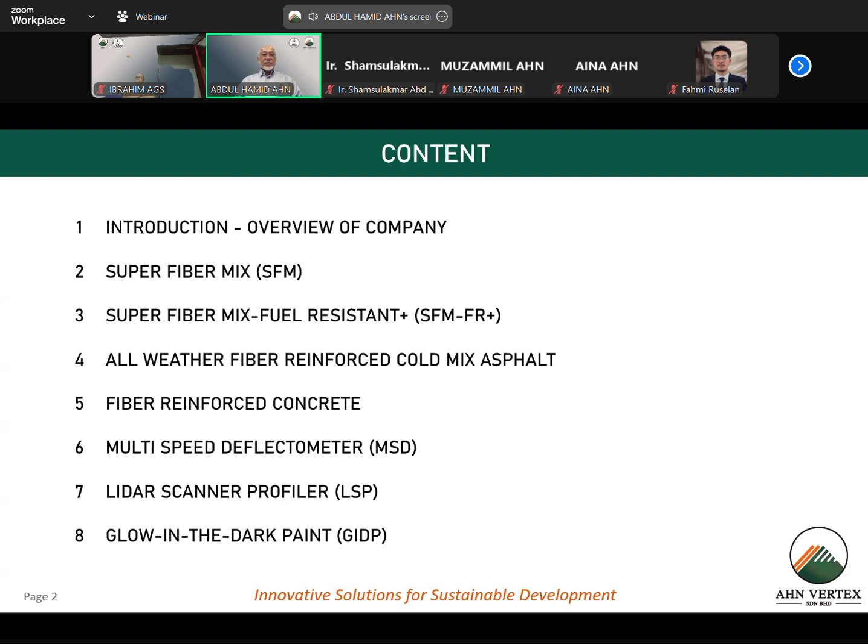Next. Right, okay, this is the company. Like Haji Samsul mentioned, established in 2015. So we are going to have our 10-year anniversary, inshallah, by February next year. Pejam celik tak sangka dah 10 tahun dah.

It is a company registered in Shah Alam. Presently, we have offices in Shah Alam Section 14. We have one at Denai Alam, and we have our warehouse and mini factory in Monteres. It's a 100% Bumiputra company.

When we established the company, the idea is to be different. The idea is to look at where is the gap in terms of technology that we can apply in Malaysia, so that at the end of the day, we want to solve problems. We want to give a better quality roads.

Presently, I think things have changed a lot. We're talking about the traffic itself has increased more than tenfold if you compare to 20 years ago. The type of vehicles is so different. And the weather in recent years has changed. So here we're talking about the environment has changed, and therefore we must change also the road construction technology to cater for all these changes.

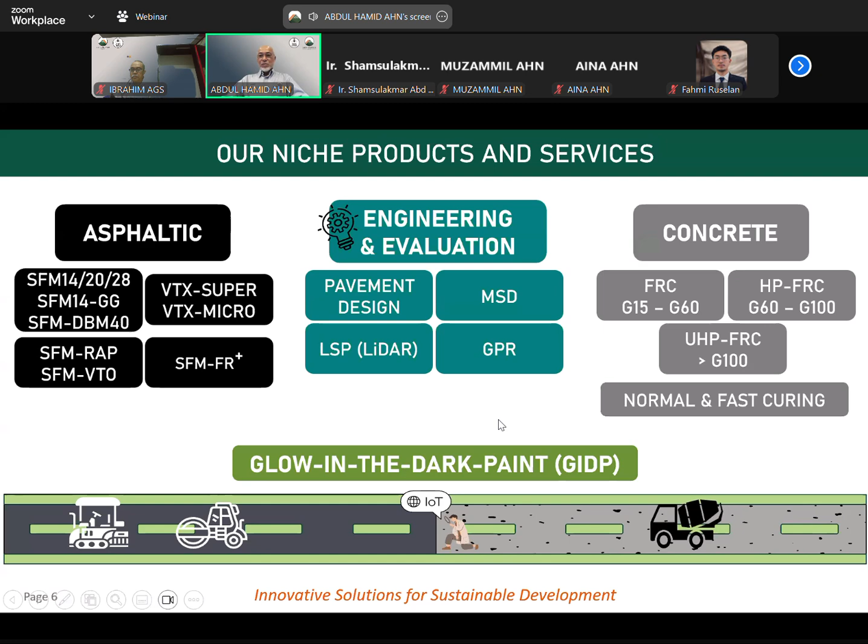Last but not least is the glow in the dark paint. It started as a hobby while looking at what new technology we can introduce. That's how the glow in the dark product came about, which will be presented by Mr. Muzamil. Okay, let's talk about the first subject.

We basically introduced this SFM in 2017. What is it? Like I mentioned before, the normal AC14 is good, it has been used widely around the world including Malaysia. But it also has its limitation because it doesn't last as long as it needs to, especially with the condition of traffic and weather now. That's why we came up with a special mix called super fiber mix.

What is it? It's basically a base material which can be any hot mix, applied in wearing course or binder course. So it can be used as normal dense mix or special gap graded mix, also in the binder with different sizes of aggregates, using normal bitumen, PEN 60/70. So that's the normal bitumen — we are not using any special bitumen because, like I said, one of the criteria when we develop a new mix is we want to make it cost effective. But we add a special fiber called Forta-Fi fiber, which consists of two different fibers.

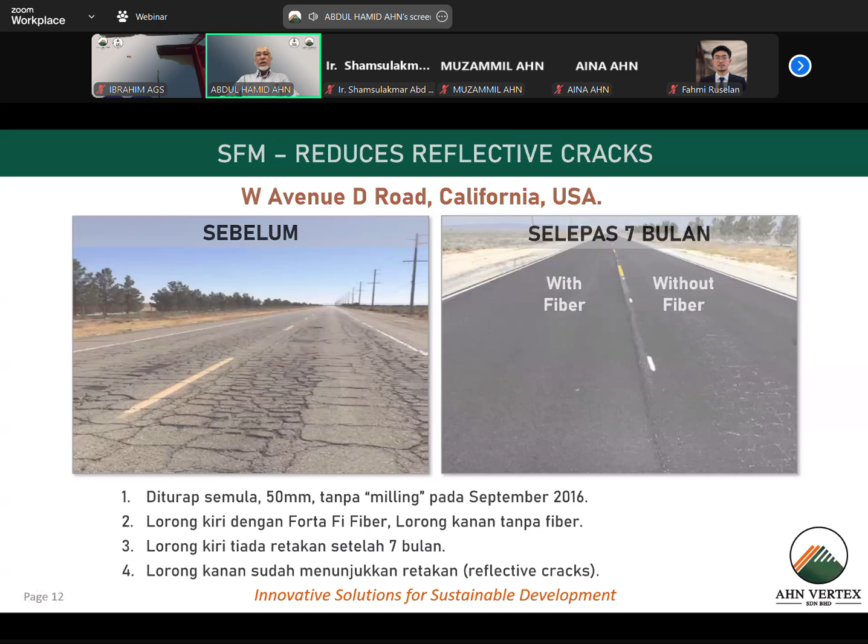This is also a very interesting video that I want to share with you. Before that, I just want to show you that when we add the fiber at the dosage we use, very low dosage, only 0.05% by weight of fiber to the mix, it provides quite a lot if we arrange the fiber. I'm talking here about aramid fiber: 1 cubic meter of asphalt contains 950 kilometers length of aramid fiber. So it's a lot. Although by weight it's very light, because it's light, the volume is high.

The best thing is that with the fiber, it reduces ruts and cracks. Here is a video just to show you how strong it is when we add the fiber into the mix.

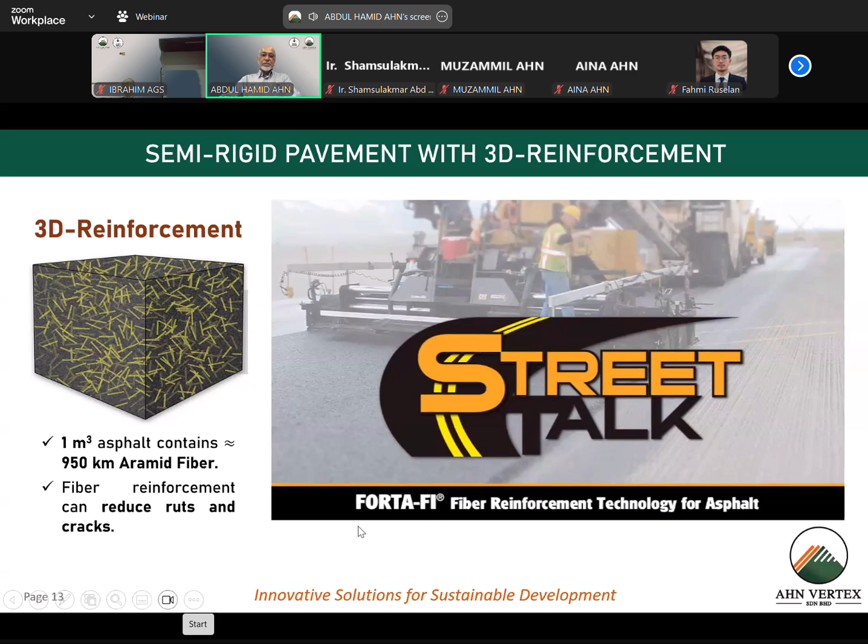One of the biggest challenges we have is talking about how to fortify this. Let me show you this: when we add the fiber into the mix, it will look like this. You can see the fiber strands here clearly. You should be able to see the fiber because it doesn't melt at the mixing temperature that we use.

This is fiber reinforcement - we actually have fibers living within the asphalt for the life of that product. If you put this product in, what we noticed was something very interesting. That was a project where typically, when you have a pipe that breaks, the asphalt will go over the edge of where the ground had washed away, and it simply breaks off.

In this particular case, I'm going to show you - this location is at a Boeing manufacturing plant, at one of the taxiways. SFM is used in runways and taxiways of these facilities to reduce maintenance.

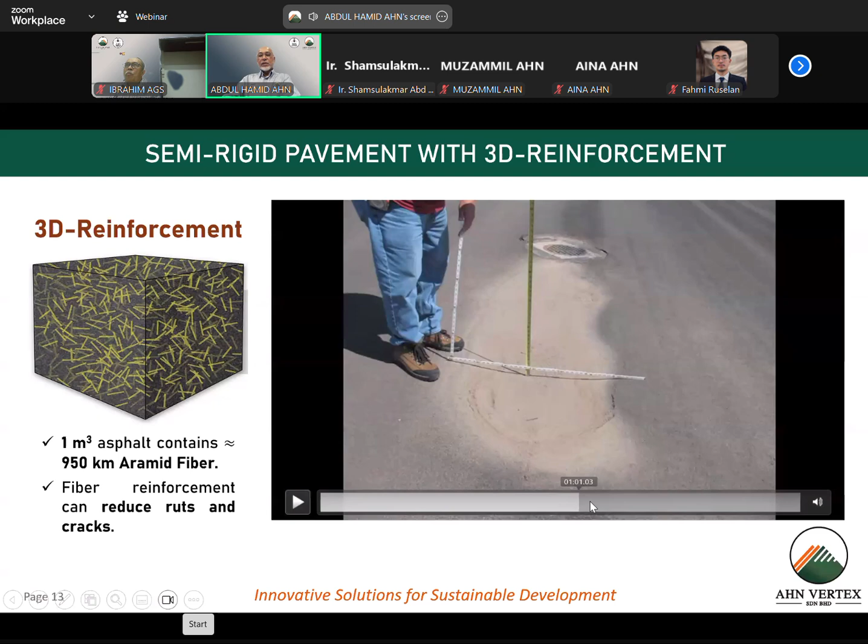Let me try to find it. Okay, this is the picture. We used SFM in this pavement, but there was a failure because of a pipe break. The pipe was broken, water got to the bottom at the base, and therefore it sunk a bit.

Typically, if you have a lot of water underneath, you can see crumbling and basically disintegration of the mix. In this case it didn't - it only sunk, with some minor cracking at the edge. But it failed, so it needed to be repaired. There's a manhole pipe across here, and a pipe leak caused this defect.

This mix is called semi-rigid pavement - this is what we mean by it only having a 2 or 3 inch crack even where the ground had washed away. I asked them to repair it and send me videos or photographs, and what we got back was really amazing. They ended up doing a saw cut around the entire piece, attached a single anchor point in the center, and plucked out an 8-foot-long slab of asphalt in one piece. Why? Because of the reinforcement provided by the fiber.

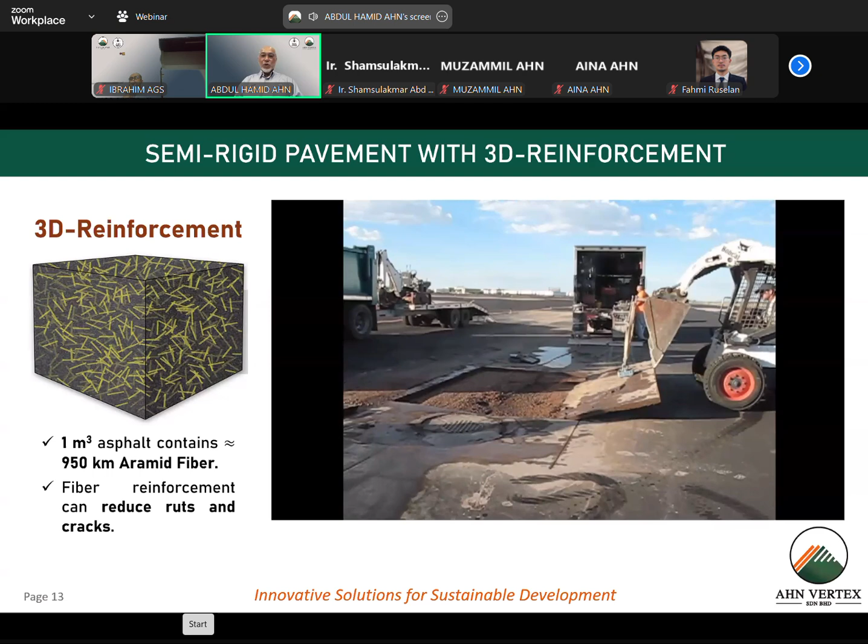This is also a case when we talk about stronger and more durable pavement. This is at the Meru Tunnel, or Menora Tunnel - some people call it Menora Tunnel - on the southbound Plus highway. This is the condition before January 2021. It was badly defective and had to be frequently maintained - almost monthly maintenance was required. The severe issue was ground failure because of water encroachment into the lean concrete underneath.

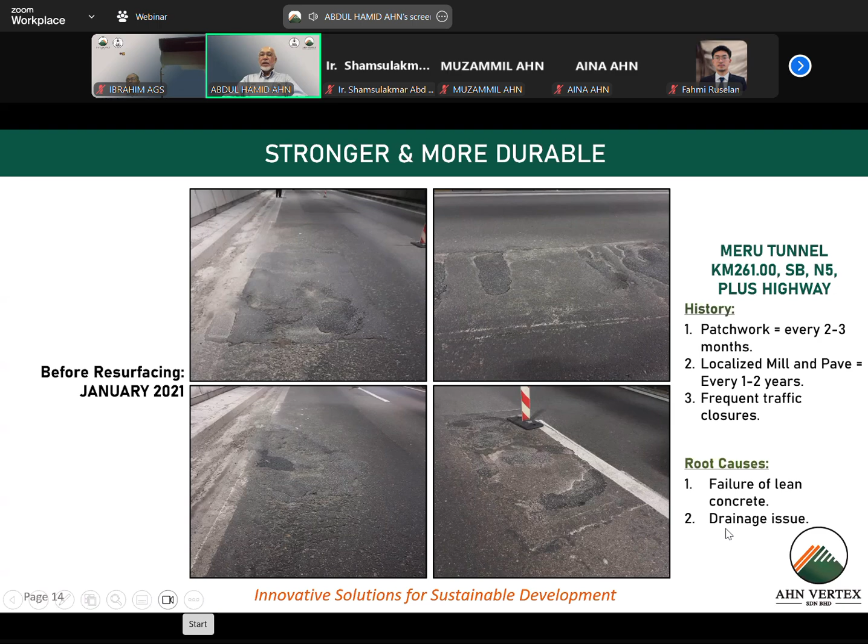These are the tunnel and drainage issue problems. So what we did, together with the Plus team, was come up with a solution where we permanently repaired the drainage issue and used SFM. So until today, instead of defects every month, with the SFM there's been no maintenance for the last - I think it's coming up to 1.5 to 2 years now. Yeah, 1.5 years, no maintenance. So you can see the strength really helps reduce maintenance.

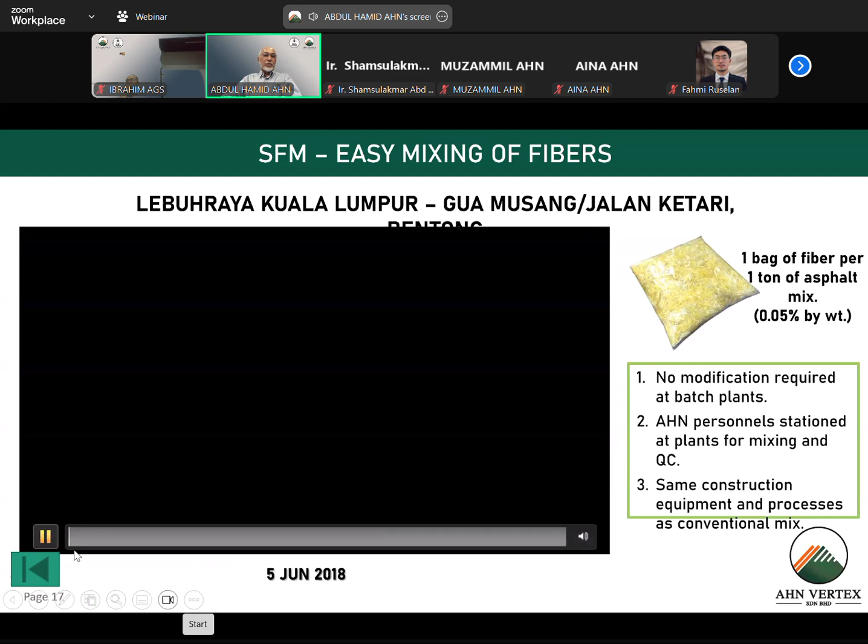So that's stronger and durable. Another advantage is that it's so easy to mix - we design it such that there's no requirement to repair or modify the plant. Our fiber is infused into the mix at the plant. This is a good video of a project we did in 2018 with JKR and Roadcare.

Just throw the bag there. It looks easy, yeah? Of course, only qualified people will do the mixing. It has to be done at the right time, right place, right temperature, at the right dosage. But you don't need modification of the plant. So that's why SFM now is one of the mixes that is widely used in Malaysia, because the application is so easy.

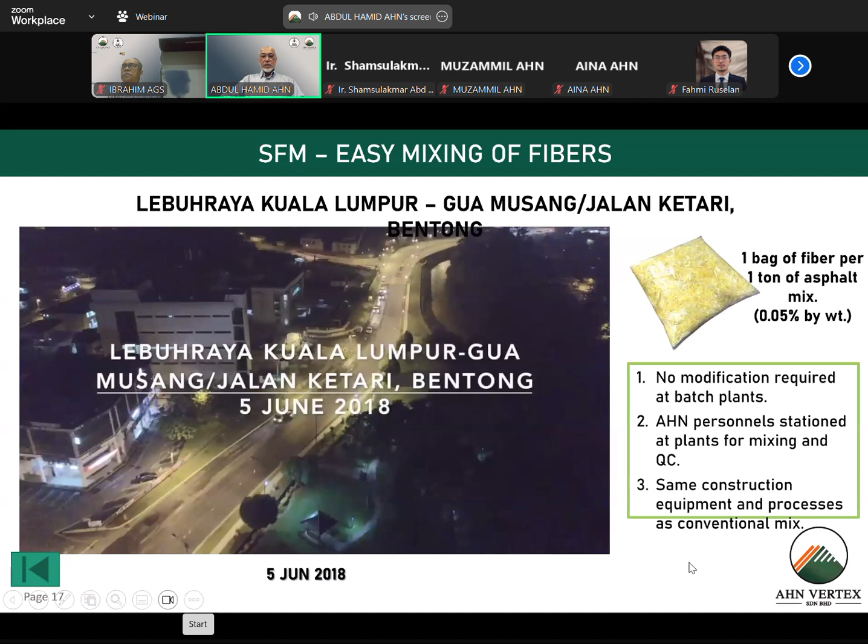Installation is also simple, let me see if there's any. Installation basically is the same installation technique as per the conventional. There's no change or modification to the procedure as well. So it's really plug and play. What we need is only to add the fiber into the mix at the plant.

You have a longer working window. This is good for the contractor because normally when you send it from the plant to the site, depending on the location of the plant, you lose temperature, and there is a minimum temperature you need to keep so that when you lay the asphalt mix, it can be compacted. But the beauty, one of the advantages of SFM, is the heat loss is very low, so you can keep it longer at the roadside. You never know there will be a problem at site where you have to keep the lorry at the roadside longer, and you don't want to lose the heat too fast. So this is also an added advantage.

Another advantage is proven track record. We have used it quite a lot in Malaysia. In fact, our record as of December last year, we have paved equivalent to more than 8.6 million square meters of roads in Malaysia, especially in JKR and JKR State, which is 69%, and the highways, mainly PLUS highway, 25%, and the rest comes from PBT. So it is proven track record. It is suitable in Malaysia. We have more than, I think, seven years of track record in Malaysia, including Sabah and Sarawak.

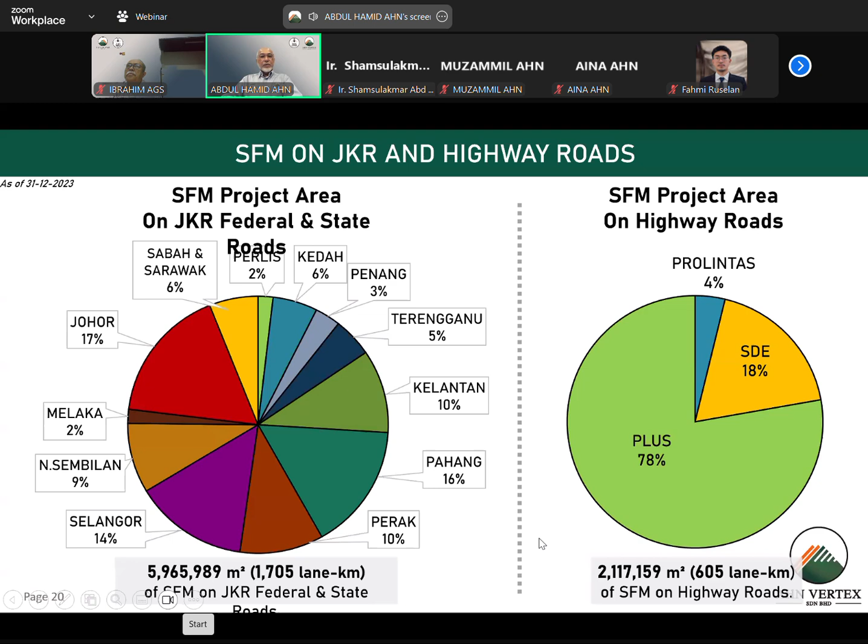This year we have also used it with other highway operators like PLUS SDE, probably others as well. I think this year we have NPE, quite a few, 2-3 concessionaires are using the SFM project now. So I think that's proof that it is suitable and it works, and we have repeat orders.

This is our clientele, basically all major players in Malaysia, have already used our SFM.

Okay, let's look at the performance of SFM. So you look at the performance, it is really proven. Look at the normal stability, Marshall properties. If you look at AC, normal AC JKR specification has to be bigger than 8,000 Newton with flow 2-4 and stiffness more than 2,000. Our specification is of course different because it is a specialty mix.

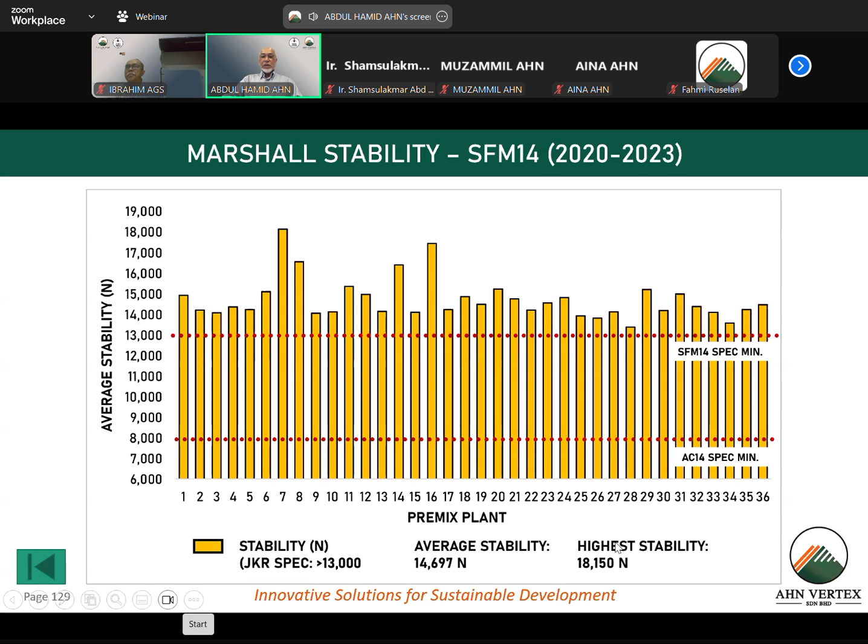This is the track record, some of the track record that we have done. This is at Jalan Istana in Pahang, where we only overlaid.

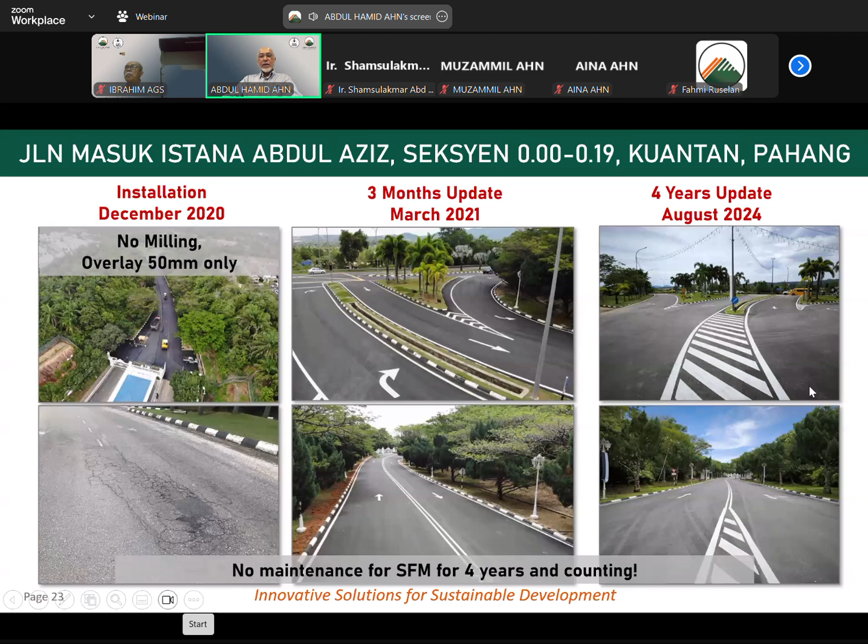Where we only overlay, we did not mill. This is the condition before. In this case, because of the budget constraint, I think JKR and Roadcare decided just to overlay, in view of the base is still good. The crack is severe, but it's not total failure. So we just overlay in 2020, and so far until today, Alhamdulillah, it's already coming to 4 years, still in good condition without any defect. So if we talk about maintenance, there's no pothole for the last 4 years, and there's no maintenance, so cost is very low.

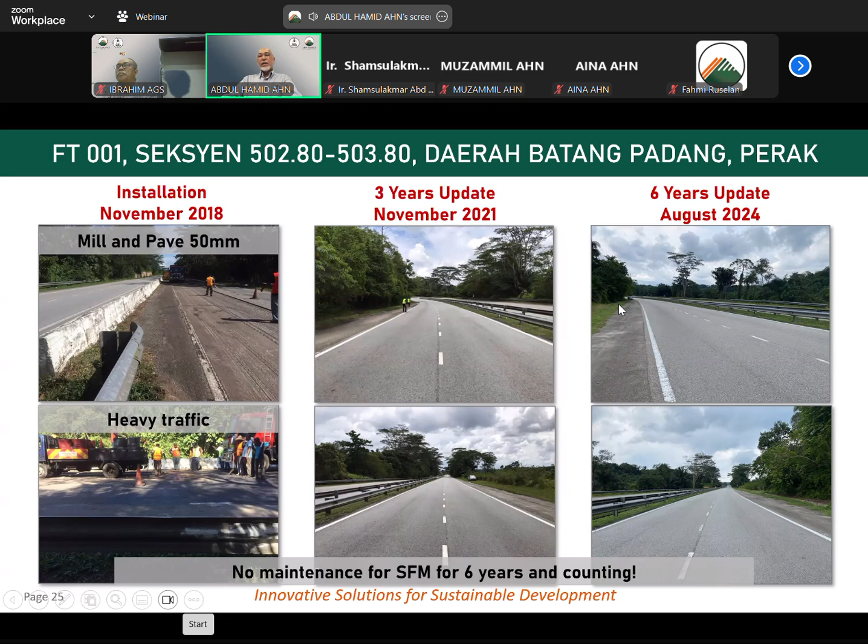In fact, the longest one that used SFM is already more than 10 years actually in DBKL, which I will share with you later. Another advantage is the moisture resistance. In Malaysia, as you are aware, it's a tropical country, it's very wet, we receive plenty of rain. Most of our properties, if you look at the standard, does not emphasize on the ability to resist water issues.

But in this case, just want to demonstrate that with the fiber, it can reinforce the mix better by providing a high tensile strength and high tensile strength ratio. When I say ratio, it means the strength of the mix in wet condition compared to the strength of the mix in dry condition. Meaning, the higher the better. Under perfect condition, we want it to be 100%. Meaning, you notice in Malaysia, after rain, you can see the defects start to arise, start to come, you can see it start to crack, and some potholes will develop.

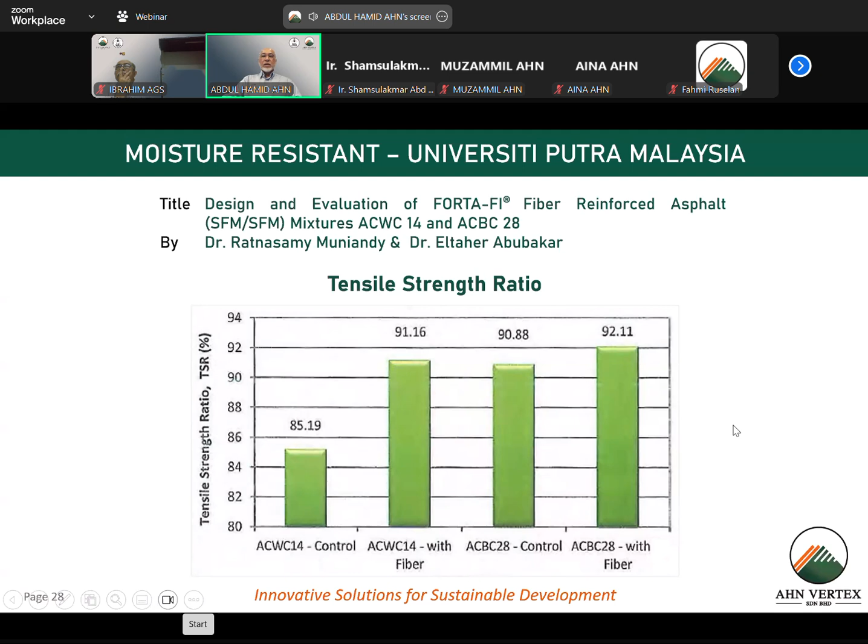Why? Because during wet condition is where the mix is the weakest. Tensile ratio, because water is the enemy of the pavement. Once it's wet, it's the weakest. Imagine when it's weaker, and with the pumping pressure from the tire, that's where the cracks start to happen, and in some cases, spoil of the mix. So you want to have a high TSR, tensile strength ratio of mix. In SFM, our average is about 89% in the real world, and sometimes it goes to 80%, 90, almost 100%, like 98, 97%. Compared to the normal one, at the lab level, this is 85%, in real world it varies between 70 to, I think, 85%. So tensile strength ratio of SFM is higher compared to the normal one, and that's why we have cases where...

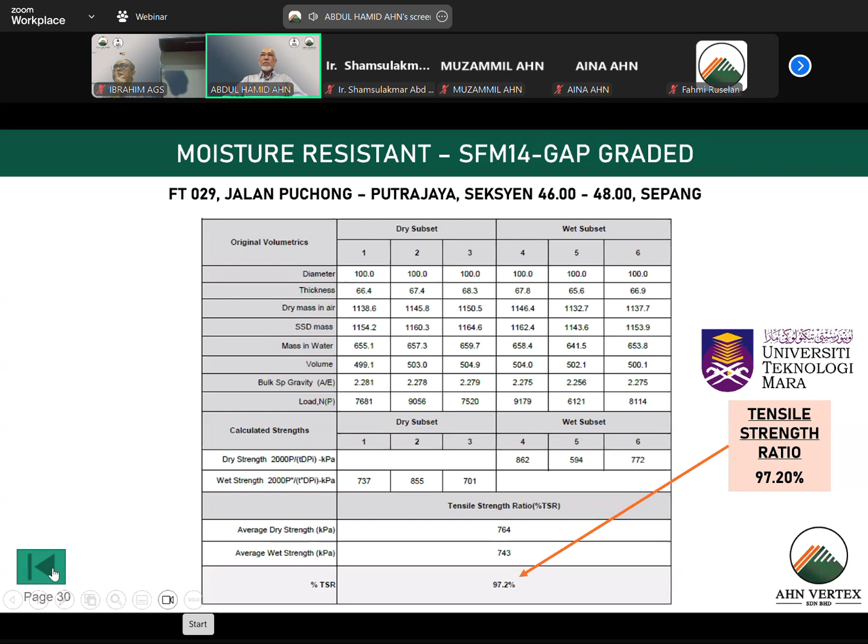In this particular location, our TSR was about 97%. Yeah, it's very, very high. That's why it doesn't fail easily, even though at wet condition, because the strength during wet condition of SFM is about the same as the strength when it's dry. Okay, supply so far, I think we have never failed to supply, even to our big clients like Plus and JKR, where yearly we are talking here, we are producing almost more than 200,000 tons yearly.

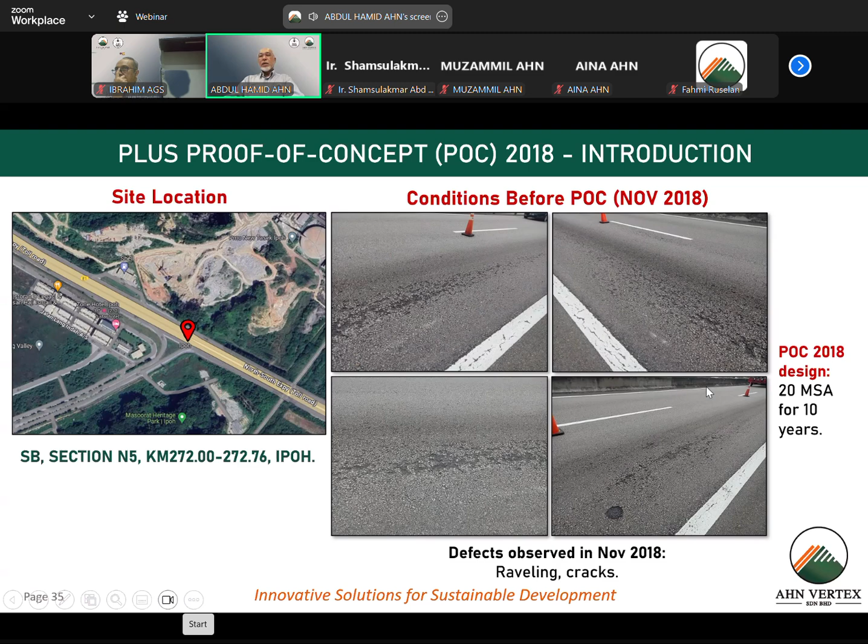And cost is the most important thing. With the use of SFM, this is the case in Plus. Location is at northern region at Ipoh, kilometer 272 to 272.7, about 760 meters. This is actually proof of concept when we did it in 2018. This is the condition of the pavement before the POC. There's a lot of crack, raveling, and at that time the design of the road is actually 20 MSA for 10 years, so they expect in 10 years to achieve 20 MSA.

But in real life, actually we achieved more than 23 MSA in half of the time. So that demonstrates that the traffic volume in Malaysia has increased, in this case doubled within less than 10 years. We have 3 sections in this POC.

One is mill and pave 200 mm, we call it MP 200. This is the control section where we use conventional mix: about 90 mm of DBM, 60 mm of binder, and 50 mm of wearing course.

The next 330 meter section, we change things. We do not touch the DBM, we only change the binder with normal mix AC28 60 mm, and use SFM on the wearing course. So here we call it mill and pave 110, because 110 mm of new material is used - the bottom is normal, and the wearing course is SFM.

The last section, about 330 meters, mill and pave only 50 mm. So we just replace the wearing course.

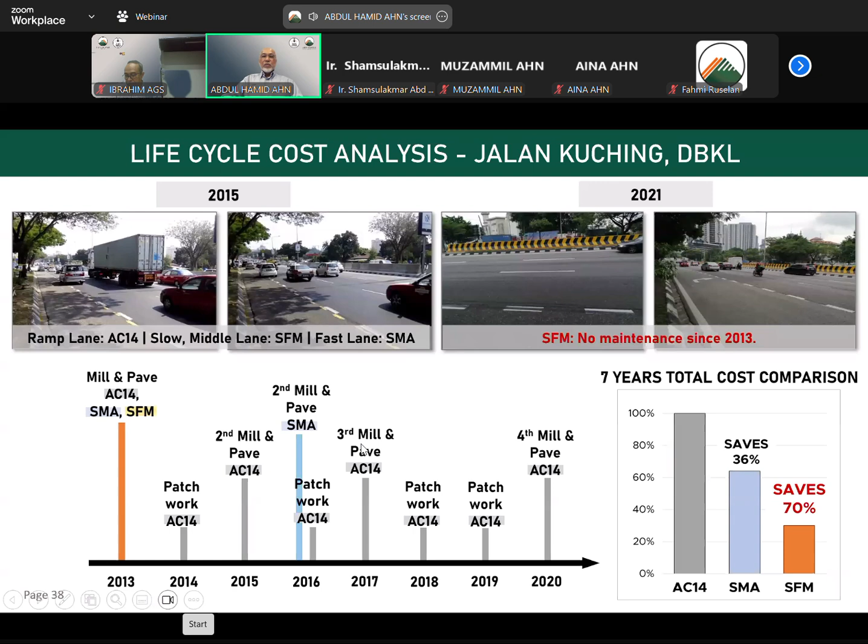If you look at the cost, without looking at cost escalation of material, just looking at the cost of the day, compared to normal AC14, SMA saves about 36% cost - talking about maintenance cost life cycle. With SFM they can save even more, 70%, because it can last longer. Alhamdulillah, until today the road still requires no maintenance, but I think since last year I can see there's minor defect happening in the SFM section. But here we're talking about 10 years, so I think it's very, very good performance. This is also a good cost comparison in terms of life cycle cost.

So I think that's the most important thing for any asset owner, in this case the government, looking at cost effectiveness of material. This will help the government reduce maintenance cost over the life cycle. It's environmentally friendly, and we're getting the green certificate soon. Not only is the material itself beneficial, but less natural resources will be used because there's less maintenance required. We can also use recycled material to make the SFM.

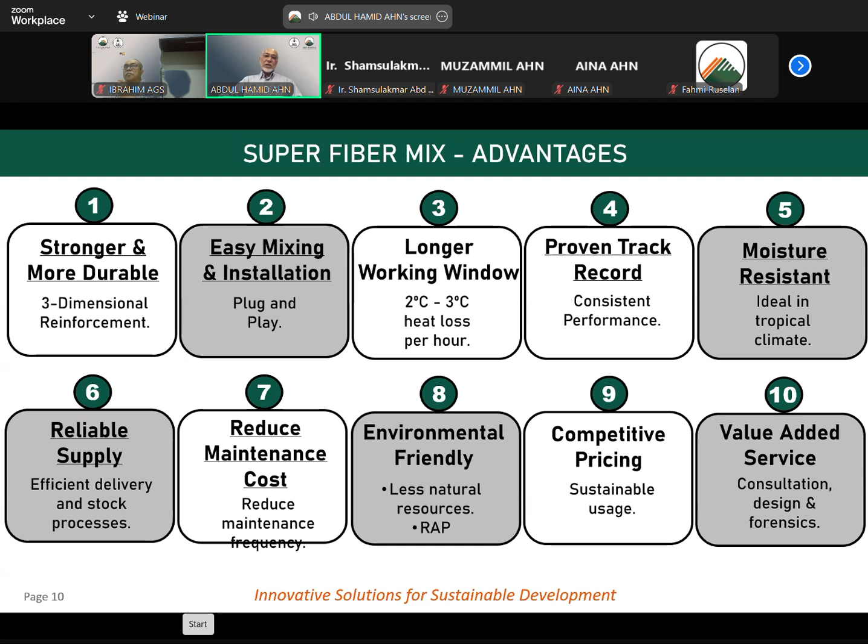So there are many advantages for the SFM. The material is approved by JKR. In a nutshell, a very good performance by SFM has been demonstrated over the last 7-8 years, and so far it's one of the specialty mixes being used in Malaysia the most. So that concludes my first session. It took a bit longer, but we will quicken it a bit since it's already 11.

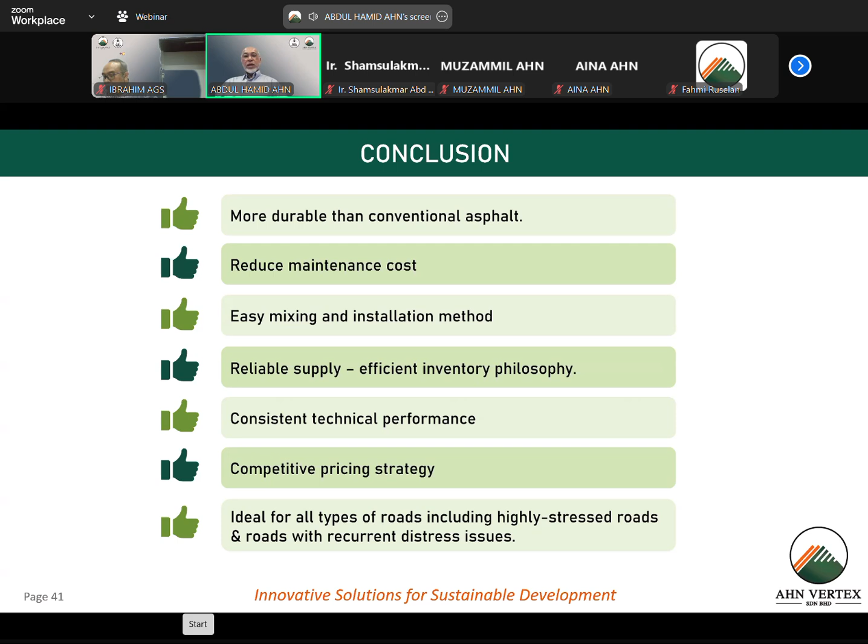No, so far we have not experienced that. With the QA/QC process we have put in place, we make sure the mix is done properly. The first thing everybody should know is that the mix is done by AHN VERTEX ourselves. We will send 2 or 3 qualified personnel, engineers or technicians, to the plant to do the mixing. So far we have not experienced any problems with the mixing, though there are QA/QC processes we need to implement.

Assalamualaikum warahmatullahi wabarakatuh. Okay, let's continue. So the next topic will be super fiber mix fuel resistant. This is actually our latest product, and it is an extension of the super fiber mix, but it is fuel resistant, whereas SFM is not fuel resistant.

As we know, asphaltic material is very susceptible to degradation by fuel spillage, which can occur either because of high volume traffic or a faulty vehicle. The problem is when there's fuel leakage, it will seep into the asphalt material and dissolve the bitumen, causing it to peel off and causing raveling on our road. In fact, there's a study where they submerged an asphalt core in diesel and observed the resilient modulus performance over a long period of time.

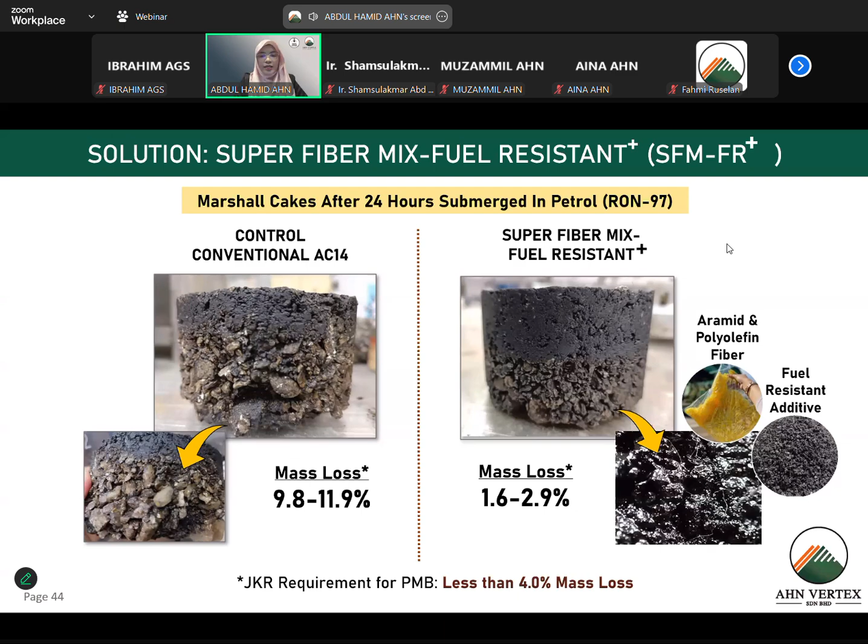Following the JKR requirement for PMB, the mass loss must be less than 4%. For control or conventional AC14, the mass loss is very high, about 12%. But when we add our aramid and polyolefin fiber, the same fiber in SFM, plus another fuel resistant additive, it can reduce the mass loss to only 3%, between 1.6 to 3%. So this new product is actually fuel resistant.

Resilient modulus, as explained by Encik Hamid, is important. Let's say we want to design a pavement and we know one pavement has a higher resilient modulus than the other - we can make this pavement even thinner, so we can save costs in this situation.

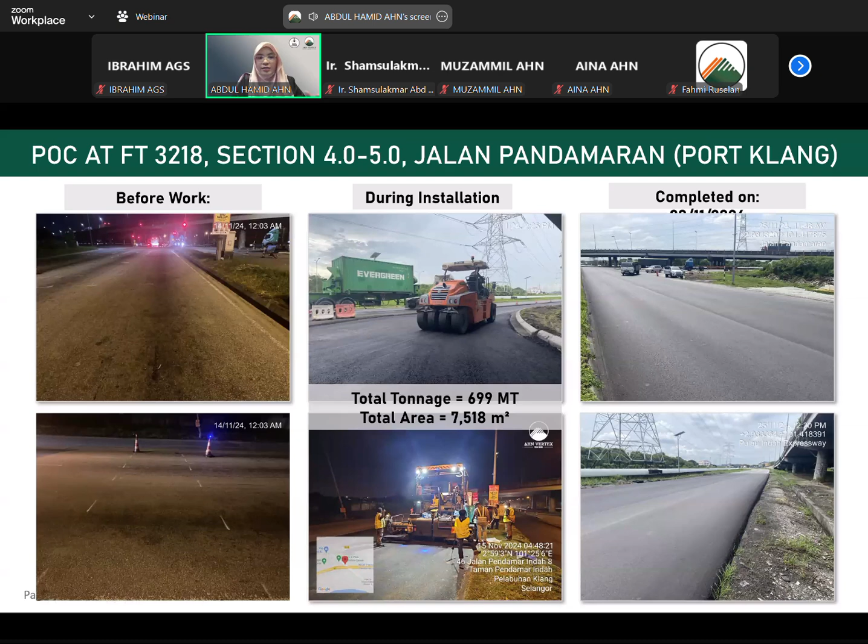The total area was about 7,000 square meters. You can see the photos for the before work - there's a lot of diesel spillage because there's a lot of traffic lights here as well. As of now, about 1 week after, the condition of the road is still good, even though there's fuel spillage, it's still maintaining its performance, and there's no raveling.

Now I'm going to talk about the next product, which is our fiber reinforced all-weather cold mix asphalt.

We know in Malaysia there's a lot of potholes, and if there's potholes, you need to patch them with cold mix. There's a lot of cheap cold mix available in hardware stores, but even if you buy cheap cold mix, if you have to keep patching it over and over again, the long-term cost is actually really high. So we offer the all-weather fiber reinforced cold mix asphalt - at a bit higher price compared to conventional ones, but because it's very durable, instead of patching over and over again, you only need to patch it once and don't have to worry about it anymore.

The special thing about these two products is they have the same fiber as our SFM, and we also have a chemical additive to improve workability on site, making it easy for contractors to use the cold mix, and also for storage. This product is also our own R&D since 2018, 100% Bumiputra, our own formulation, our own manufacturing.

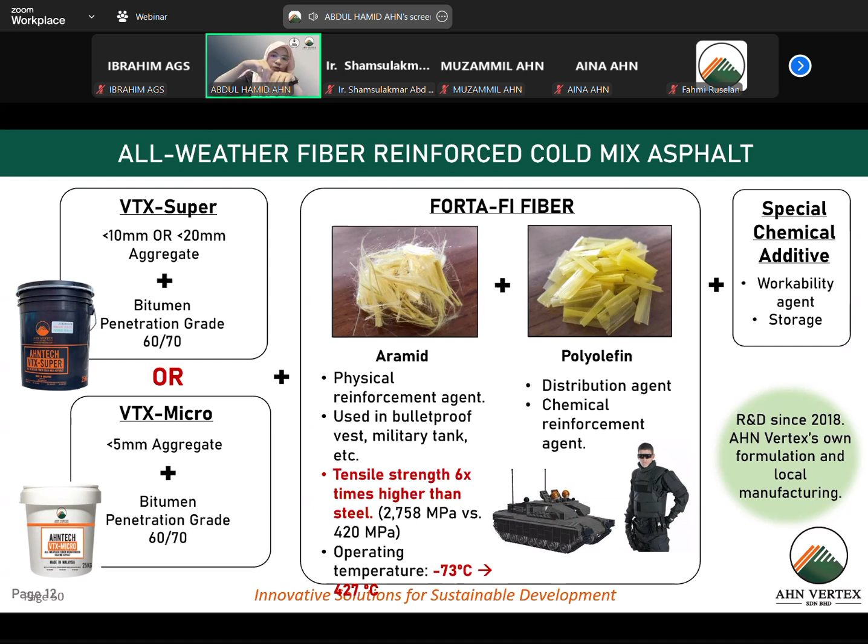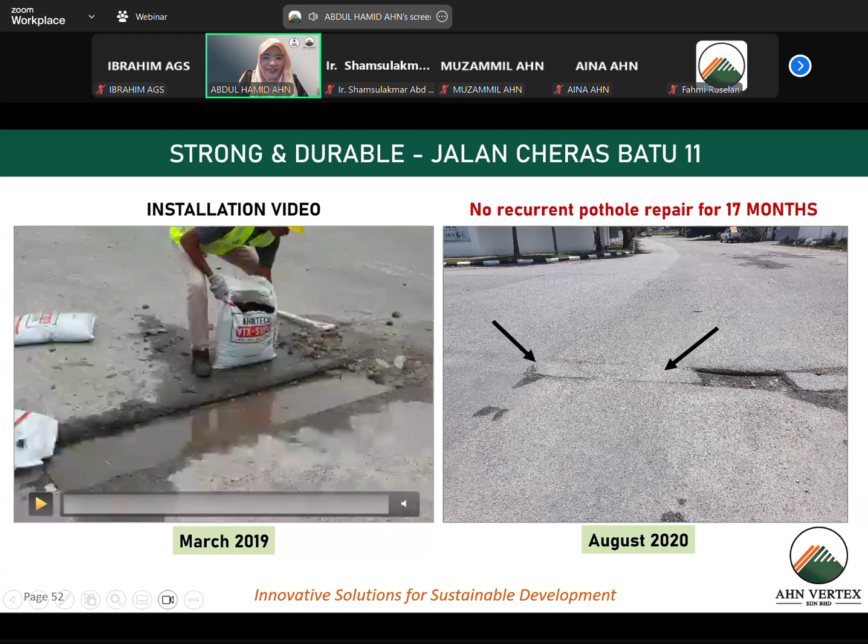This is an example of our product. This is our first test done in Jalan Cheras Batu 11. Back then we still used gunny sacks.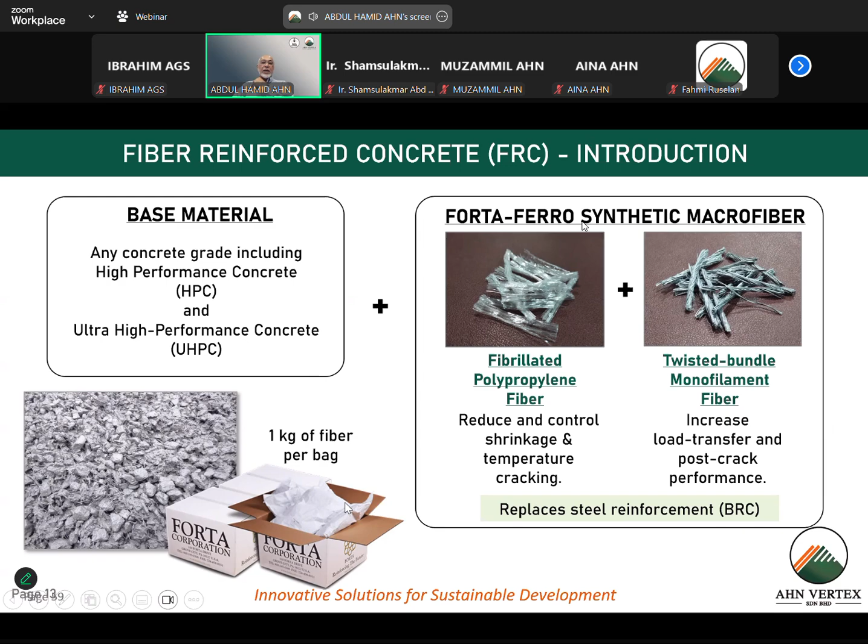The idea is basically to replace the steel reinforcement, BRC or mesh wire if you want to call it, so that it is easier to handle, and inshallah it will also be cheaper. It comes in a 1 kg bag of fiber.

Application is only for non-structural elements. It can be used in concrete pavement, basically concrete on grade, floor on grade, factory or warehouses, motorcycle lane, road curb. For multiple level building parking lots, you can also use it for the topping.

You have already the concrete slab, and then you want to top it with the fiber concrete. Can use for drains. Can be mixed in situ at the site. A New Jersey barrier can be used also, or for a jogging track.

This is for house developers or area commercial development. Can also be used for shotcrete, helicopter pad, or any floor concrete on grade. So it's only for non-structural use for now.

We are doing R&D to see the application on structural elements. What are the advantages? Main advantage is it is stronger and more durable. It provides three-dimensional reinforcement. Here I have a demonstration why it works.

This is a video comparing the impact test, one using ferro, the other on the right side without the fibers. We just try to hack it using a jackhammer, and you can see on the right, where there is no fiber, it just breaks into two, just fails.

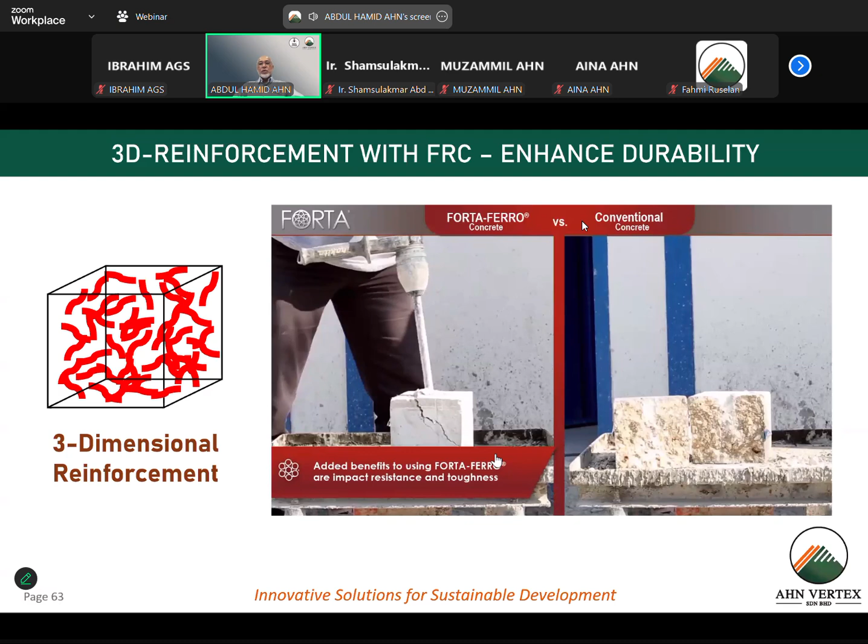While the one with the fiber stops. It still fails at the same time, but it has post-crack resistance to make it more durable. In this case, it really takes a long time to break it. Trying to help break the cube, and at the end of the day, of course, you can see it's broken, but you can see the fiber there - it takes much longer, more than 10 times, to crack open the cube, because with the three-dimensional reinforcement, it provides resistance to crack propagation.

Here is a simple compressive test, the normal test on the right without the fiber, on the left with the fiber. So we compress it, and you can see it fails about the same time, but the nature of the failure is so different. On the right, it already spoiled, while on the left, because of the fiber, it still holds the pieces together. You might have a crack, but the fiber will help to control and resist the crack from going further.

On the right side is a simple impact test where we use a thin slab and drop a hammer. The first one is the slab without fiber - we just drop the hammer, and it just breaks into pieces. Now the next slide is the same slab, but we add fibers into it, and we drop the same hammer, same thickness of slab, and this is what happened: it absorbs and resists the crack.

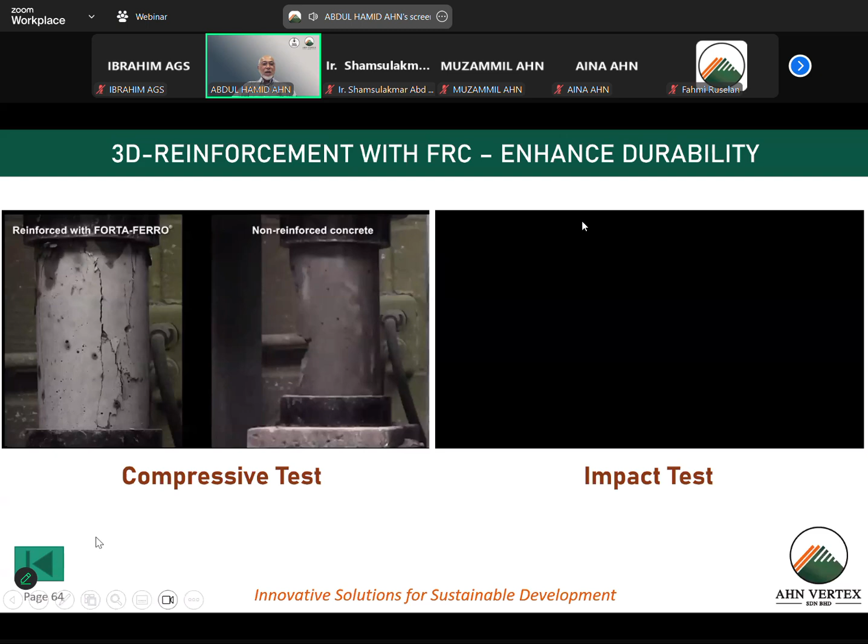So this is a good demonstration that the fiber really works. Actually, humankind have used this fiber for a long time, thousands of years, to build houses, but with the latest technology it is refined and made modern.

Easy to mix. Imagine now you are replacing steel reinforcement - that means in terms of logistics, the delivery of the mesh wire or BRC is really a headache, and then you have to find a place, a space to store it, hopefully nobody steals it. But with this one, it's so easy - this is what you do, just add the bag into the mixing truck, just like that.

So it's so easy. You just mix it for an extra 5 to 10 minutes, depending on the size and volume of the concrete, and then you're ready to cast.

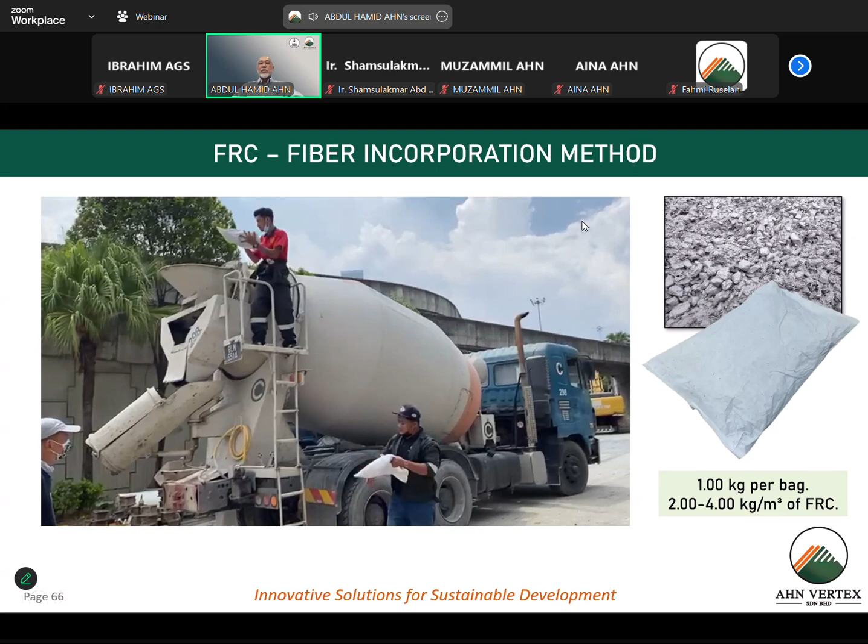It's so easy. Dosage used depends on the application and expected traffic. We can design it for you, varying from 2 kg to 4 kg. Sometimes we can use 1.5 kg, for example for a normal walkway - 1.5 bag may be enough. For 4 kg, we're talking about very heavy traffic load and high traffic volume. Just like BRC, you can design for different sizes, so here we vary the dosage to be applied for different traffic conditions.

So conventional concrete pavement uses, let's say, BRC, which will provide you only 2-dimensional reinforcement to reduce or control cracking. Whereas using fiber, that will provide 3-dimensional reinforcement, so here every millimeter of space will be reinforced by the fiber.

Of course, for conventional, we need to put the steel reinforcement with spacers, then get the truck there, and sometimes it involves double handling where you cannot go to the end of the section. This will take time. Compared to what we have, we just add the fiber into the rolling mixer and cast it, so immediately you save a lot of time. Our experience shows it can reduce construction time by up to 80% for concreting. So really it saves time, is easy to use, and provides better reinforcement.

Let's talk about the time. We can of course design the concrete - we are also concrete specialists, and can design depending on your requirement. Sometimes we can afford to close the road or section for 7 days for curing, so we use G40 and above to get the 7 days curing. But we can also design down to 24 hours.

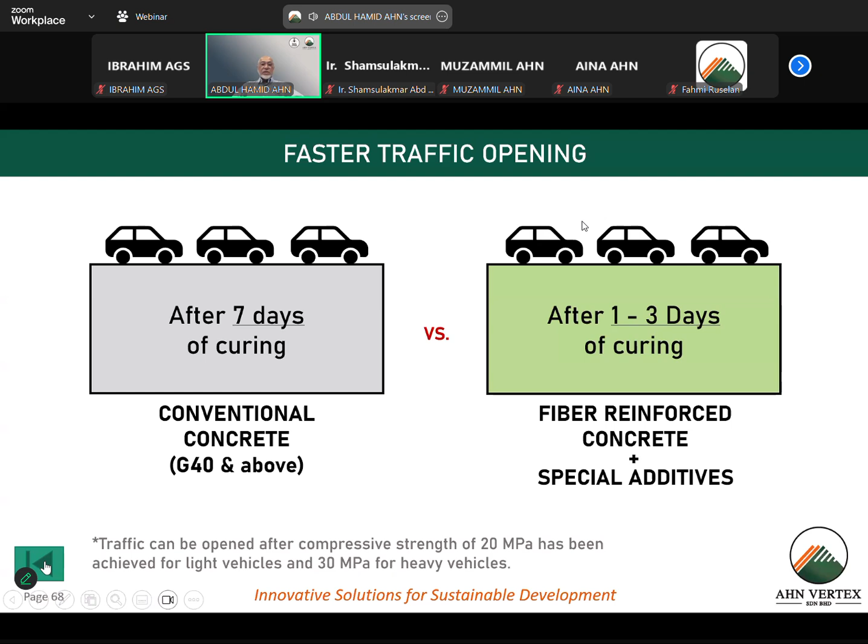So it's easy to mix and install. That's normal concrete, but mixing is faster, and most importantly, it reduces your maintenance costs.

In this case, this is our project in CIQ, FT 038. This is the commercial lane for commercial vehicles only - we need the trucks and heavy vehicles going through the lane from Johor to Singapore. This lane going up to Singapore is only used by commercial vehicles.

This is the condition of the road before we came in. So we looked at the site and proposed using concrete as a permanent solution, which we did in April 2021. It was done fairly quickly, a few days, because we used 3 kg per meter cube, G40 with 300 mm thickness. This was a 60-meter length job which we completed in 1 day.

So far, this is 23, 24, and the condition is about the same as what we see in the picture. So far it's good, there's no issue - it provides a good solution.

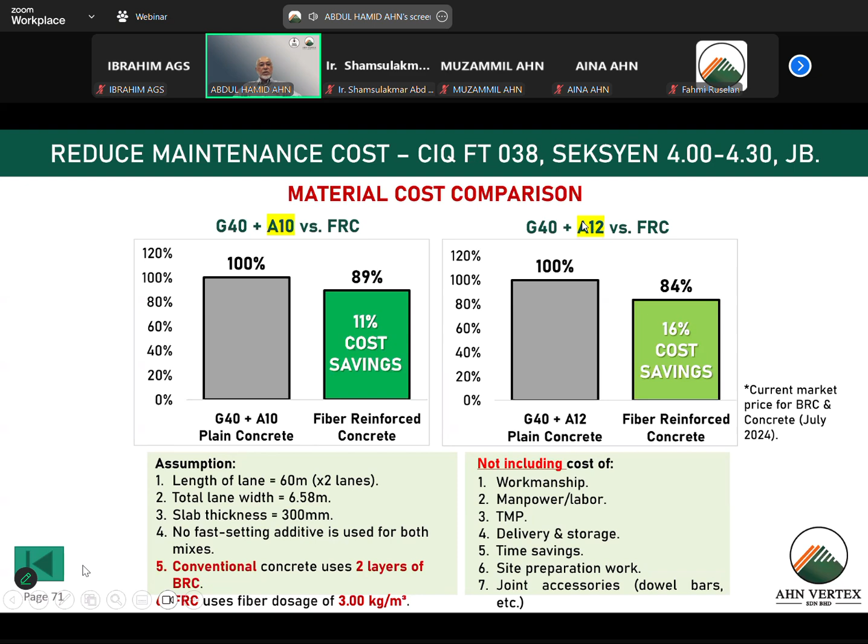If you compare with A12, of course you have more saving - this can increase up to about 16% using FRC compared to A12. So in terms of cost, it is cheaper. Material cost is cheaper compared to using steel reinforcement.

Proven track record - I think we have done quite a few jobs. What we've listed here is with the government sector or government agencies, with JKR and SAFWA, and also councils like MPAJ plus highways as well. Altogether we have done about 8,700 meter cube on about 20 projects - actually now it's 21, 22 projects, and this was last year. This is a good video that I can show you how it's done.

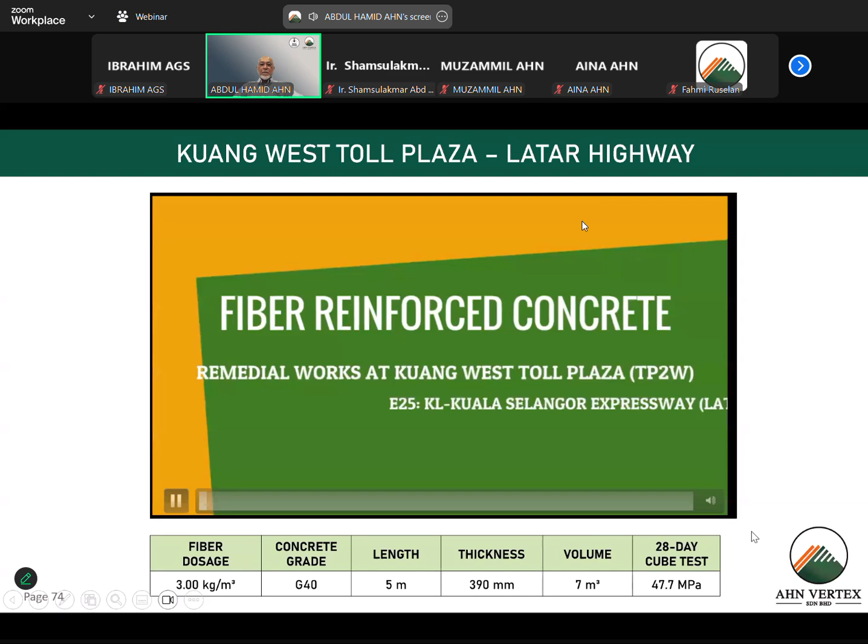This is in Kuang at the Latar Highway. They have a problem at their toll plaza. You can see quite a major crack and depression at this panel.

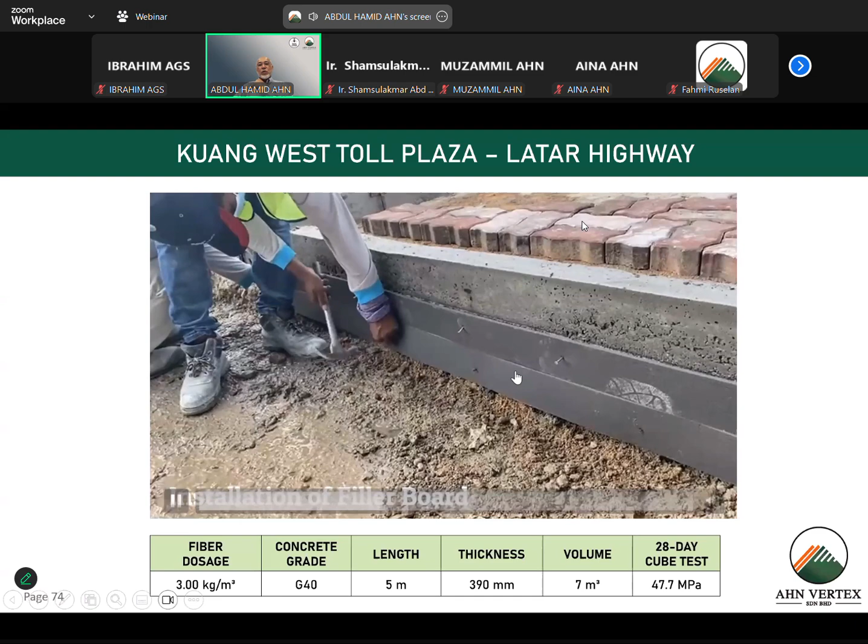Very dangerous spot, especially if you are on a motorcycle. So what we did is we hacked and removed the existing panel. Of course, installation of dowel bars is compulsory to the existing concrete, so that we allow for concrete flooring. We also installed filler board to the existing curb. And this is how it's done. We just mix it with the fiber.

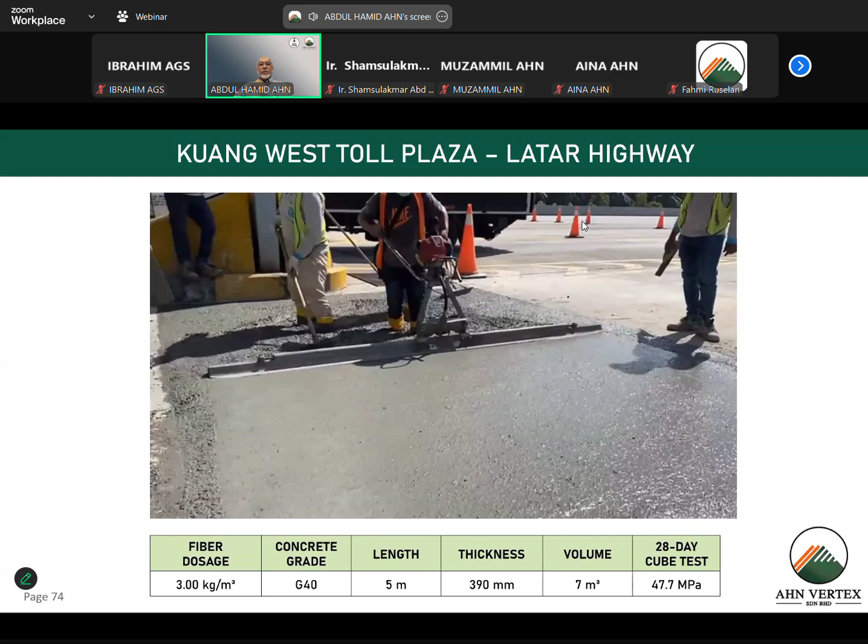Normal compaction using the vibrator. Feed it, level it. Broom finish to provide the skid resistance, and then curing compound. So normal SOP for concrete is done, and this is open after 2 days for heavy vehicle. Done, yeah, so it's quick.

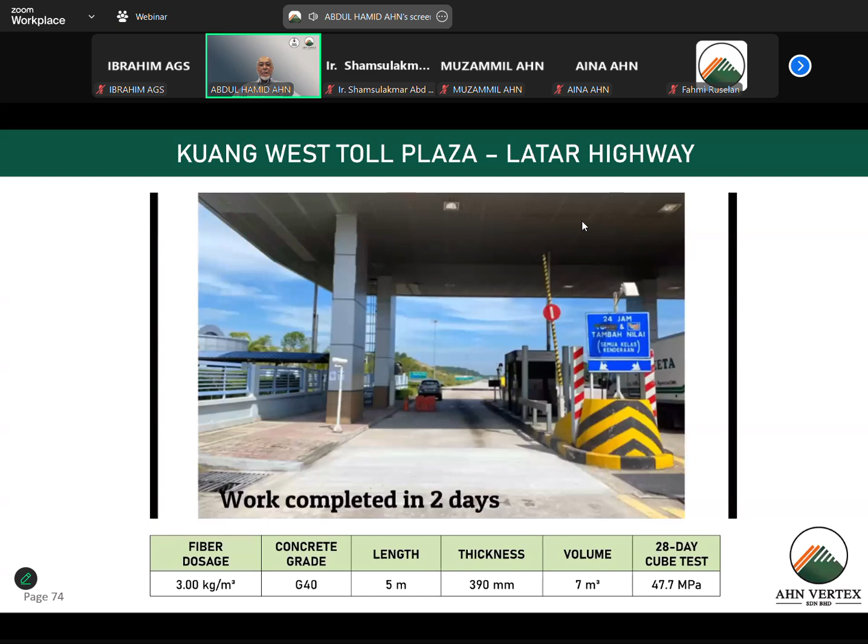It was done, I think the whole work is 2 days. I think within 2 days, you can open the traffic immediately. And no more crack until today. We inspect it every 6 months. Looks good.

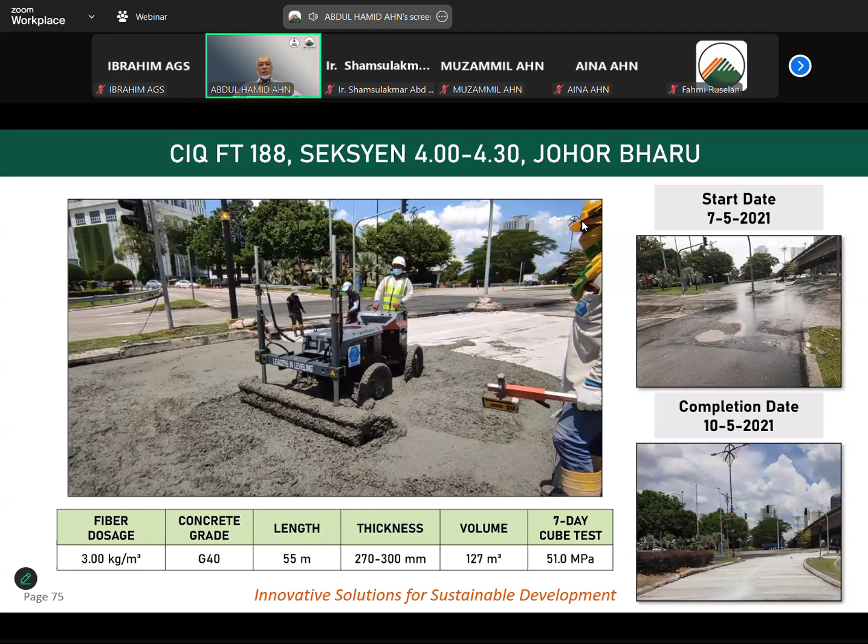This is a video in CIQ FT188 Johor Bharu at the causeway. This is how we mix it. Same procedure, but this is a bigger area, therefore we use the automatic screeder.

And broom finish. Same, we use 3 kg because it's very heavy traffic here, going into, this also for commercial vehicle, only going into the CIQ outbound to Singapore with the grade 40. With this one, I think 7 days we achieved 51. But let me remind you that adding the fiber does not increase the compressive strength. In this case, we have used, I think, grade 40.

And with some additive to increase the compressive strength a bit. And you can see this is the condition before and now. At the bottom picture on the right, this is now. Good, no more problem. Before it was just like ponding everywhere, and it's really like you could do fishing there. But now I think even the MB of Johor is very happy with the product.

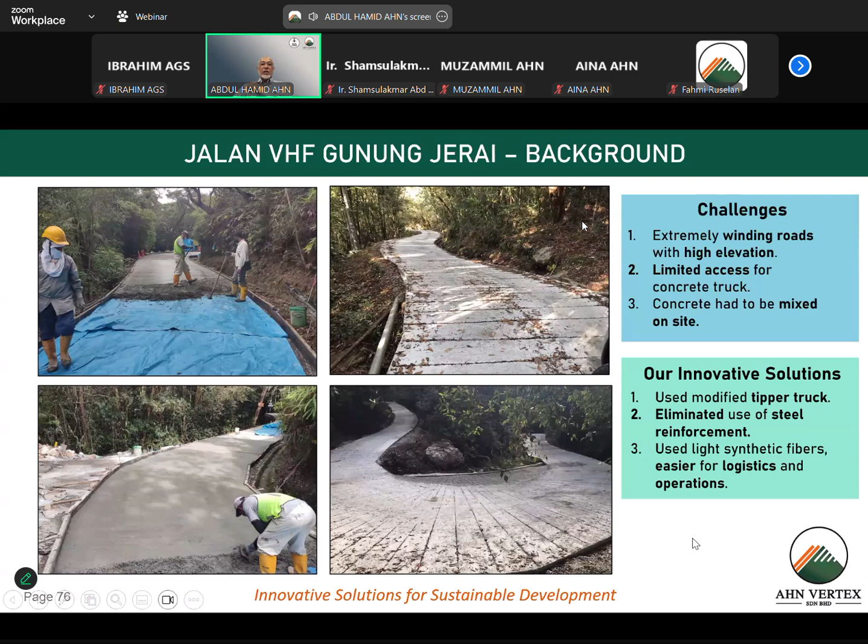You can also, in this case, we do not use the normal lorry mixer. We mix the fiber in situ because of the logistical problem. We can't get the lorry truck to climb the hill, it's too steep. Again, it's dry. Yeah, it was done, and issue solved. This is a picture of the pengarah and the KSU at that time.

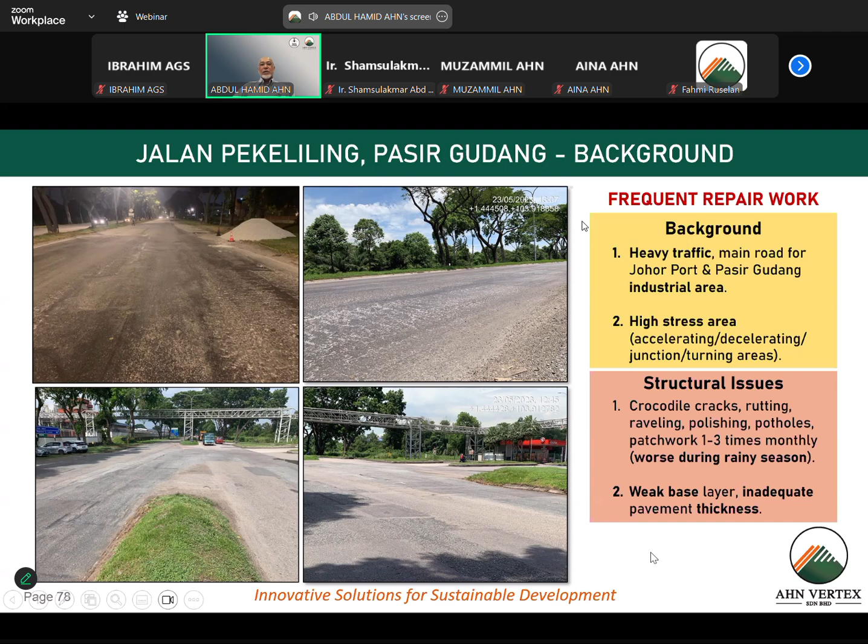Heavy traffic, as you know, in Pasir Gudang, Johor Port area, is a high stress area. Very, very frequent maintenance was required. So what we did is use our FRC, done very quickly. Again, 3 kg because of the traffic condition there. Using G40, this was also done in a few days, and until today it solved a lot of problems.

All this I've shown you just now, we did ourselves, as not only the supplier of the fiber, but also the contractor to do the job. This requires - ours, I can say we are specialists in concrete too, so we emphasize on the workmanship and quality. And Alhamdulillah, even the MB of Johor is happy with the product, and now there's no more problem in terms of the road condition at that section.

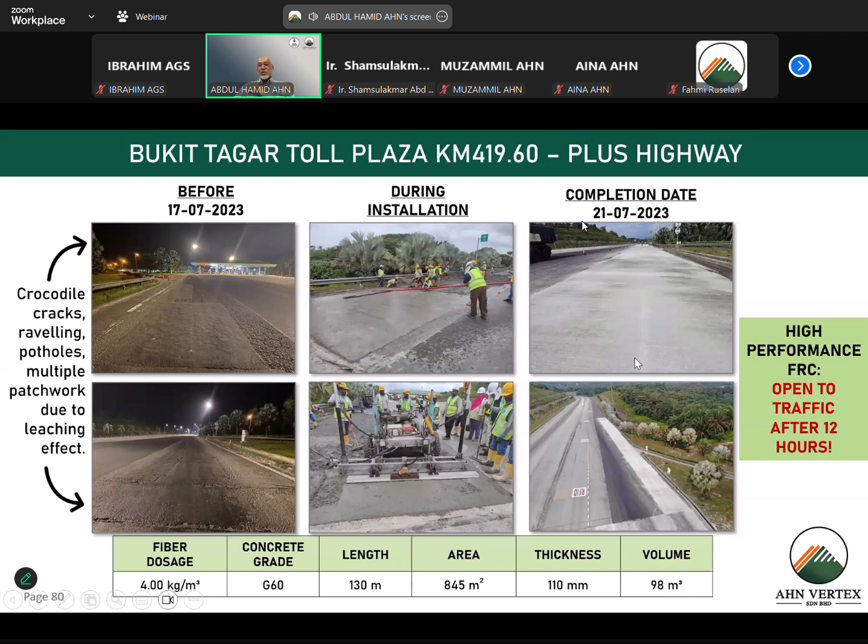This is the latest one, at the same location as our SFM FR, but over the U-turn, because of the severity of the traffic load and high stress. The condition before was very, very bad. This was less than, I think, about 6 months old asphalt surface. After 6 months it looked like it was after 10 years, or after 5 years. It was very, very bad. So we recommended using our concrete.

So again, cost saving. I think we have a proven track record just now. And if you look at our supply so far, we have supplied quite a lot with no reliability issue in supplying it. Our supply is ready to take any size of job, but of course for a bigger job, give us lead time to prepare the fibers.

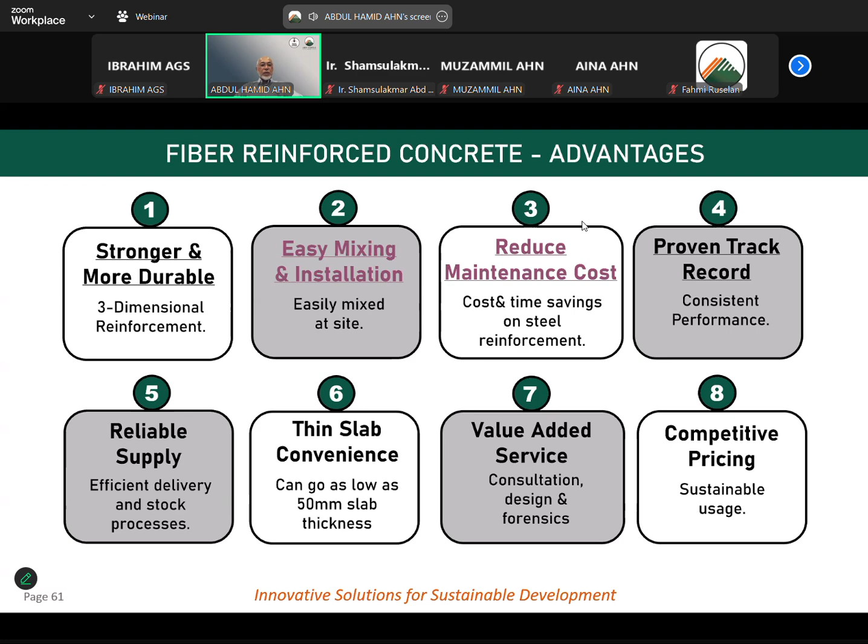That concludes this FRC section. Let me see if there is any question from the floor. Okay, yes, it has been answered at the site already. Unless there's any interesting question that you want to share with the floor?

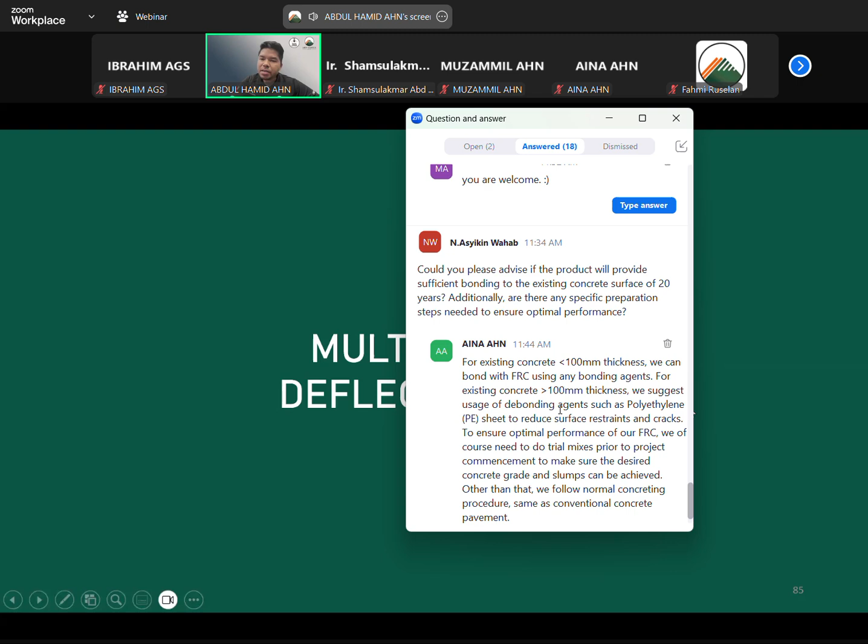The first one I have here, we call it multi-speed deflectometer. If you are familiar with PCA, pavement condition assessment, deflectometer is something you use to assess the structural condition of roads or pavement. The normal or conventional method we use for such tests is the falling weight deflectometer, or FWD. As I said, it measures the pavement's structural integrity.

However, the usage of FWD, because it's an old technology, is also static - it's not mobile. It means we have to stop at the location to do the tests. When we stop, we have to ensure the safety of the technical workers collecting the data is secure, which is why we need a TMP, traffic management plan. It's time consuming because it's a stationary test, and we have to do a couple of different tests. Because of all this process, it is tedious.

So what AHN Vertex have here today is the new technology, the innovative way to assess the pavement's structural integrity. The big difference is that it is a mobile survey. As I said, FWD is a static survey, but this MSD, the multi-speed deflectometer, is a mobile survey.

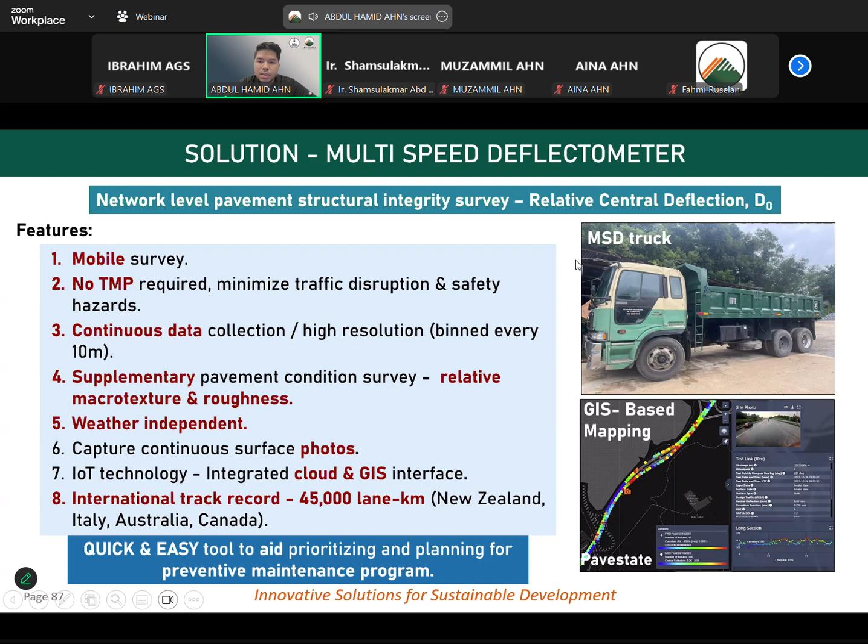It's not a new technology, relatively new in the world, but in New Zealand, Italy, Australia, and Canada, we have surveyed using MSD for almost 45,000 lane kilometers. So you can be assured that the product is reliable, and we have the results and the data to back up the technology.

So this is the process of the data collection. We will collect the data, the data will be uploaded into the cloud. Geosolve is our partner in New Zealand, and the data will be analyzed.

For MSD, we will need supplementary data from FWD. This is very important for calibration and also for GPS alignment. Once we have this FWD data, we won't need the FWD data anymore—we can do the pavement condition analysis without FWD once this calibration is done.

Once it is done, we will process the data, and then in the GIS-based or web-based output, the clients will be able to see the result of their asset or their roads. So this is one sample of what we have run so far in Malaysia.

The location is kept secret because this is one of the projects we have done on our own with our client. You can see in this picture on the left hand side there are a lot of green dots, meaning the structural condition of the road is still good.

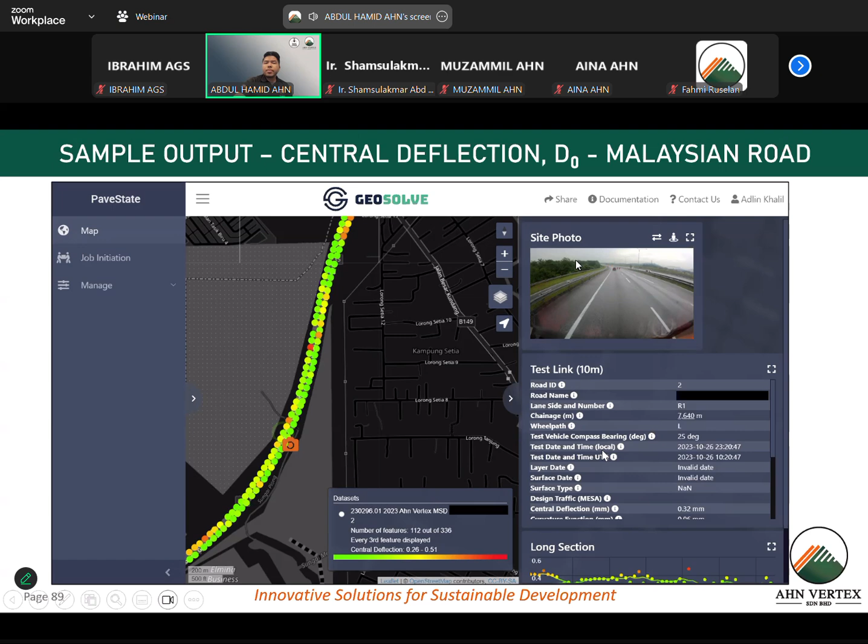As you can see, there's a small camera label, as I'm pointing out with the mouse cursor, confirmed by the images on the right hand side, showing that the pavement is still in good condition. Below, there's a lot of tagging, a lot of data that has been captured. The most important thing is the central deflection, which gives the result of the structural condition of the road.

So as I said, the results or the points are all GIS based mapping, which means every 10 meters the MSD will capture data that comes with the latitude and longitude location. We can double check, as I said, in this example, we can see that the camera is hovering over red areas, red sections of the roads.

On the camera itself, we can see clearly the distresses on the road. We can see actually alligator cracks on the wheel path and also block cracks in between. So it confirms, it verifies the data that we have collected on the road is actually the actual data that we see on the surface.

So with this tool, it is actually make it easier for the asset owner to identify the pavement section that requires maintenance or repair work. So it helps a lot.

If you have a limited budget, you can prioritize which section that you want to do first, maybe perhaps you want to do the red section first and then yellow section second, and lastly the green ones. So it helps with the maintenance program and also the budget allocation.

So the other advantage of MSD is because FWD, as I said, is a static test, and usually people do it for every 250 meter in project level. So there might be some locations or areas that is not tested by FWD. So these are all tested or covered by MSD.

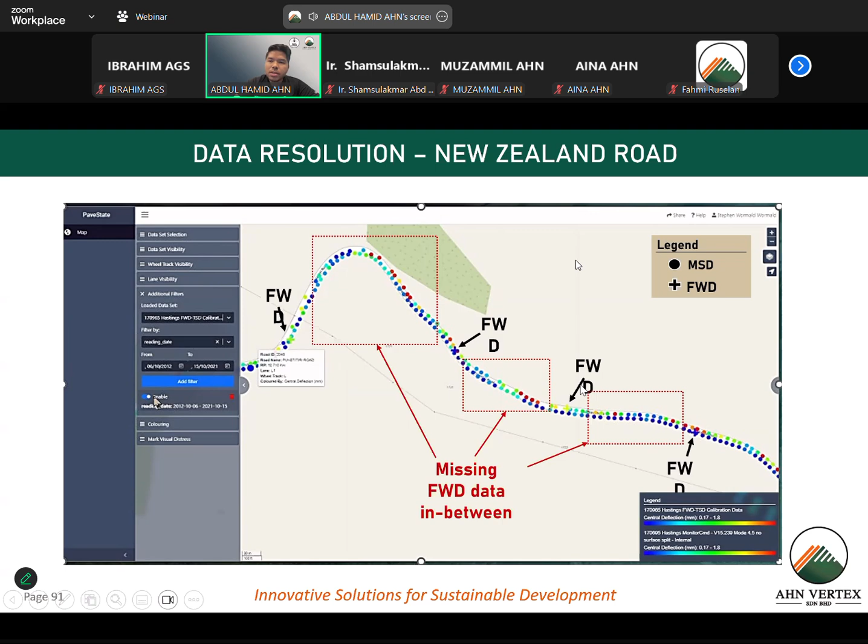So all of these square red areas, even though it is not tested by FWD, you might have some red section here, as you can see in the red boxes, but MSD will cover all that and make sure that for the missing FWD data, we have all the required data to do proper budget allocation or proper maintenance work in the road section.

So in comparison, this is just a simple comparison between MSD and FWD. FWD for a day, we can do until maybe 75 to 100 points a day.

And this testing vehicle, of course FWD, if you are familiar with it, will require a truck and trailer. For MSD, we will require a 2 or 3 axle truck.

Data resolution, depending on the point interval, sometimes in the project level we have data every 200 meters. So the data resolution is for every 200 meters. But for MSD, it's every 10 meters continuous.

Testing speed, FWD you have to stop. But with MSD, it's mobile. You can drive up to 60 km per hour to do the testing. You don't need any TMP for MSD. You will need some TMP or TMPs for FWD.

Both are weather independent, can be run during the rain. Duration to collect data, for example, I'll give here for 200 kilometers per day. So 200 kilometers of data that we need.

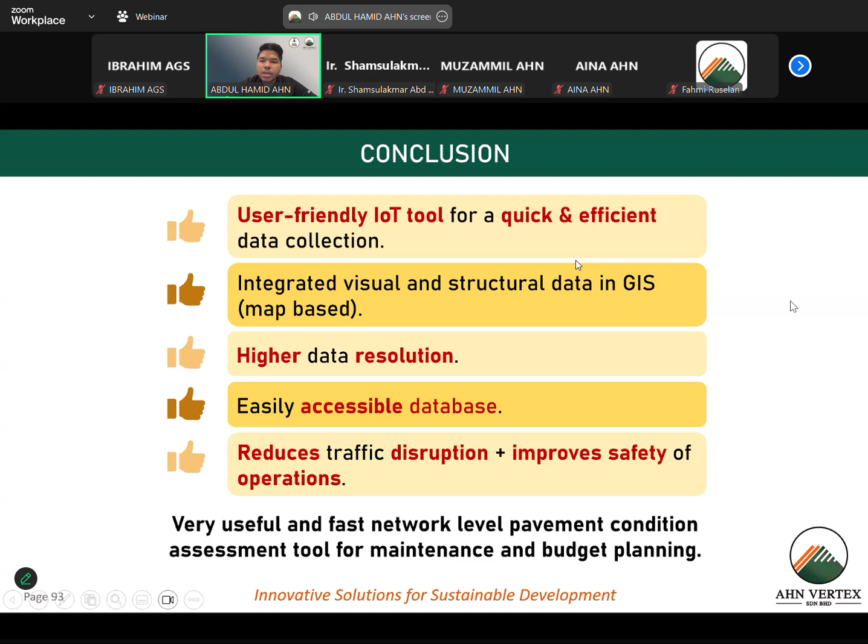So right now, to the latest technology that we have. So just now I covered MSD. MSD is more towards the structural condition of the pavement.

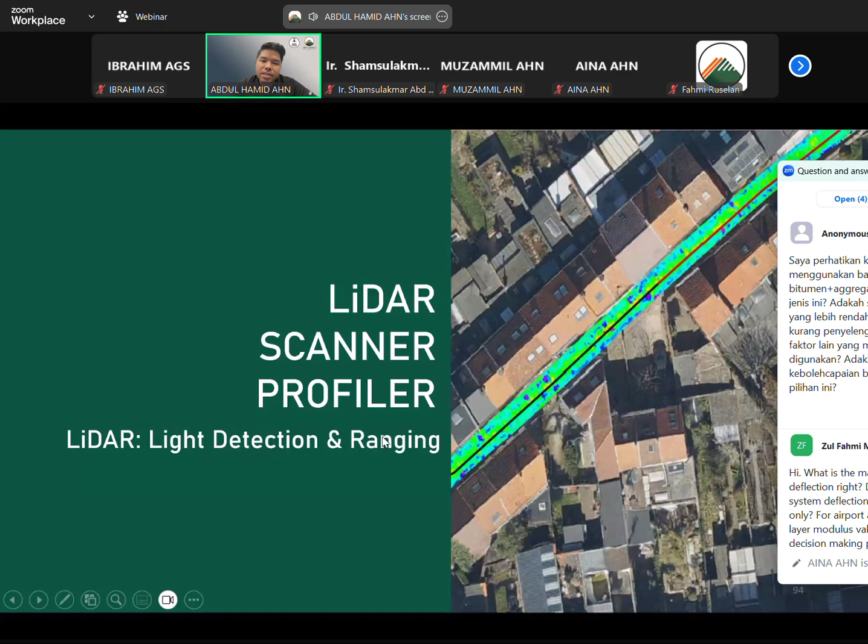So LiDAR Scanner Profiler, or LSP, is more towards the surface condition of the pavement. LiDAR stands for Light Detection and Ranging. What it does is it lets out a pulse of light or laser, and then the sensor gets the light back and assesses the distance. That's why it is used to get the surface condition of the pavement.

So as I said, for surface pavement condition analysis, we conventionally use MLP, the multi-laser scanner or laser crack measuring system, LCMS. What does it give us? First, the result is not a digital twin. If you are familiar with the product or report, it comes with a table, and for example, for a 100-meter section, it will give you the condition in a percentage. I will explain later the output of our LSP, laser scanner profiler.

Secondly, to run MLP you need at least 2 skilled operators with specialized training. It is not the case for LSP - it is really easy to use, really user-friendly. For data processing time, MLP requires significant processing time. For example, for 100 kilometers, it will require around 2 weeks of processing time. It is actually long in comparison to LSP.

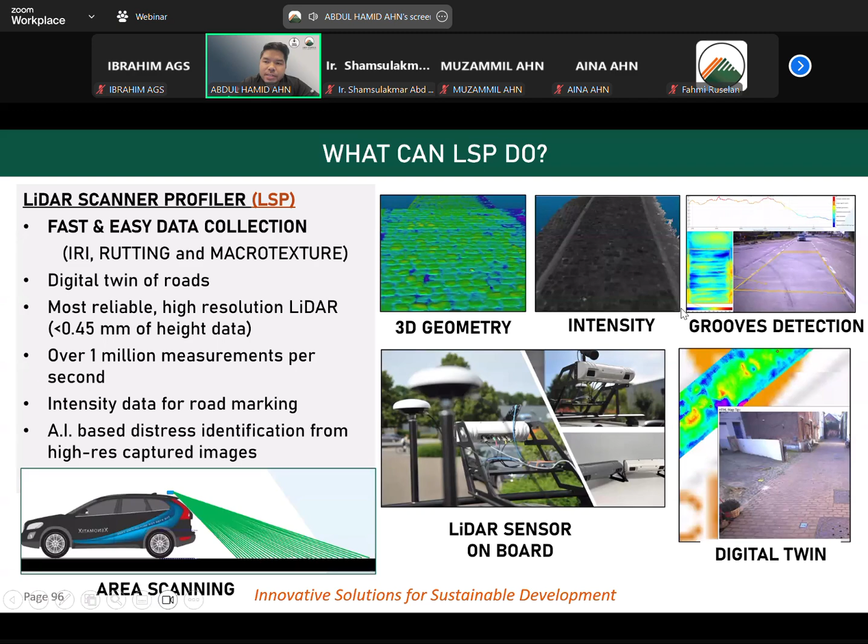In today's technology, everything we do has AI. With the image we capture on board, we are able to differentiate 14 types of distresses. This is all an automatic process - we do nothing, we don't have to sit and analyze. The AI does it for us, differentiating longitudinal crack, transversal crack, alligator crack, block cracking, damaged shoulder. All these can be easily differentiated by the AI.

In quick summary, comparing LSP and MLP - laser scanning profiler and the conventional multi-laser profiler - both can be used to collect IRI, cracking, rutting, and macro texture, which is standard for surface pavement condition analysis. But with LSP, we get a digital twin model of the roads, not with MLP. The result is displayed in a GIS-based output, which is impossible with MLP.

it doesn't have any minimum driving speed - 0 km/h, you can stop during the test and then continue, no problem. But with MLP, you have a minimum of 20-25 km/h driving speed, which can be a problem if there's a traffic jam or things like that.

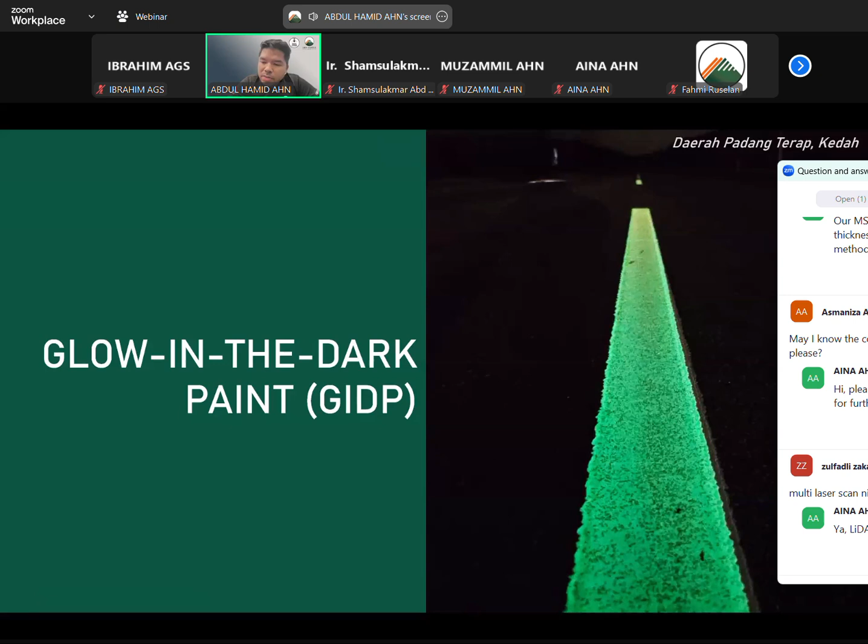I hope I have some time left to explain the last product we have today - 5 minutes. This is an innovation we found last year, because as Mr. Hamid explained, it started like a hobby. We were looking for something innovative in glowing technology, and we found this product that is the best in the world.

According to our research, there are multiple products from Holland and from Australia - they have all failed. From China too, they have all failed in their application on the road. So this is the only product in the world that has passed, with a track record of 4 to 5 years all over the world. That's why we decided to go for this product and bring it into Malaysia.

Okay, the advantages of this paint. If you have the opportunity to come to our booth, we will demonstrate it. You can usually see this product at our booth.

You can see that it is charged by sunlight. You don't need any electricity, you don't need any charging station. It is 100% charged by sunlight. So when it is charged by sunlight and you don't use electricity to power it up, it means we have zero CO2 emissions, very environmentally friendly.

It glows in the dark up to 10 hours. When we say up to 10 hours, it means that when it is fully charged, requiring around 40 minutes to 1 hour of charging, it will stay charged and glow up to 10 hours.

It is already certified by SIRIM. We have done the test in SIRIM, also in France. It is the only product in Malaysia that is certified by SIRIM, the glow in the dark product.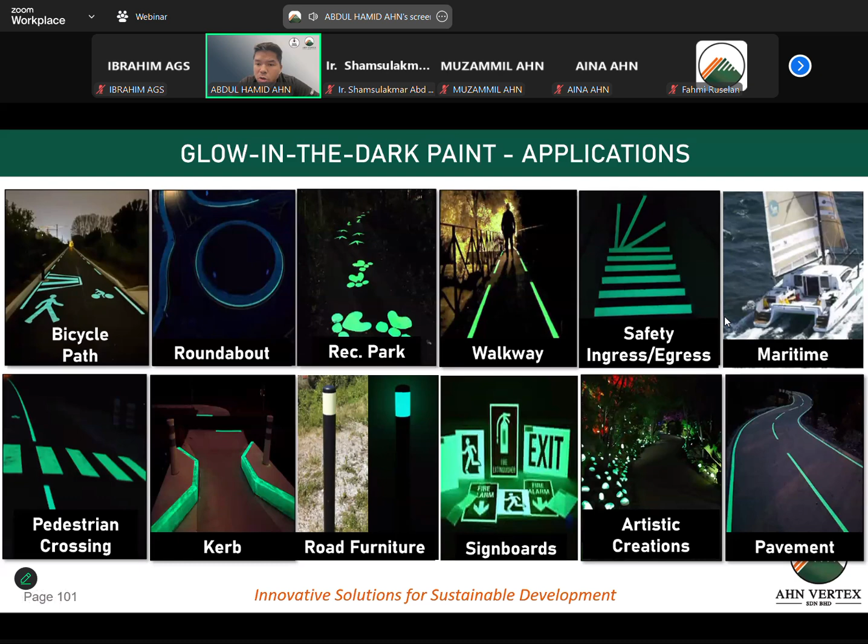Because it is a paint, there are limitless applications you can do. You can do it on bicycle paths, in the park, in the walkway. You can do it in the safety ingress or egress in your factory when there's no light or short of electricity. You can put it on boats because it is resistant to maritime conditions. You can use it as pedestrian crossing or curb, anything you want, maybe to increase the safety element of the object, also in terms of artistic creation, because it looks very good.

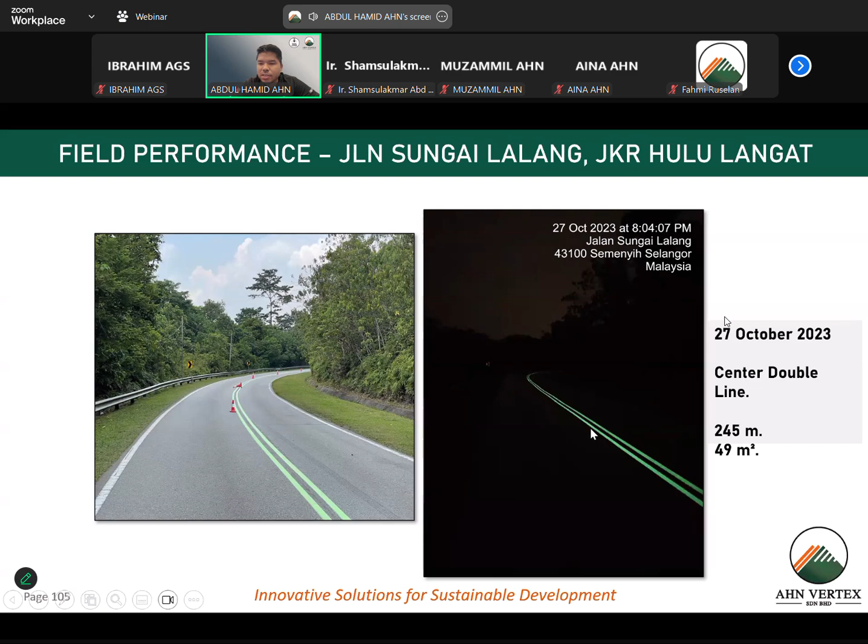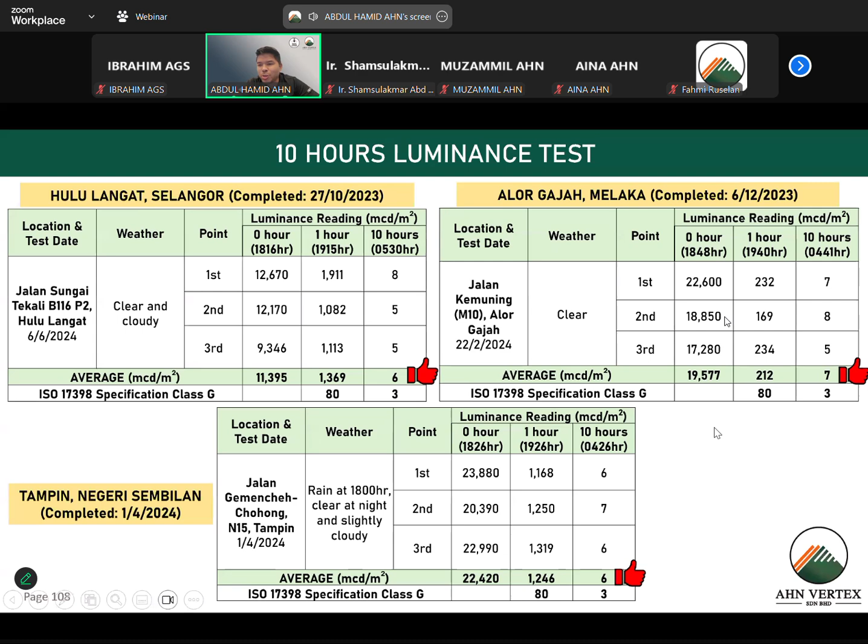In terms of performance, when we say 10 hours, we have done tests and collected results from our applications, and this shows that the paint indeed can last up to 10 hours, as we have stated in our brochures and flyers. Right now in Malaysia there are several other glow-in-the-dark products that claim they can last up to 10 hours, but in reality they can't. We have done our internal tests ourselves.

So this is the result of the luminance test that we have done, for the 10 hours performance glowing time. This is according to ISO 17398. The test is done by SIRIM.

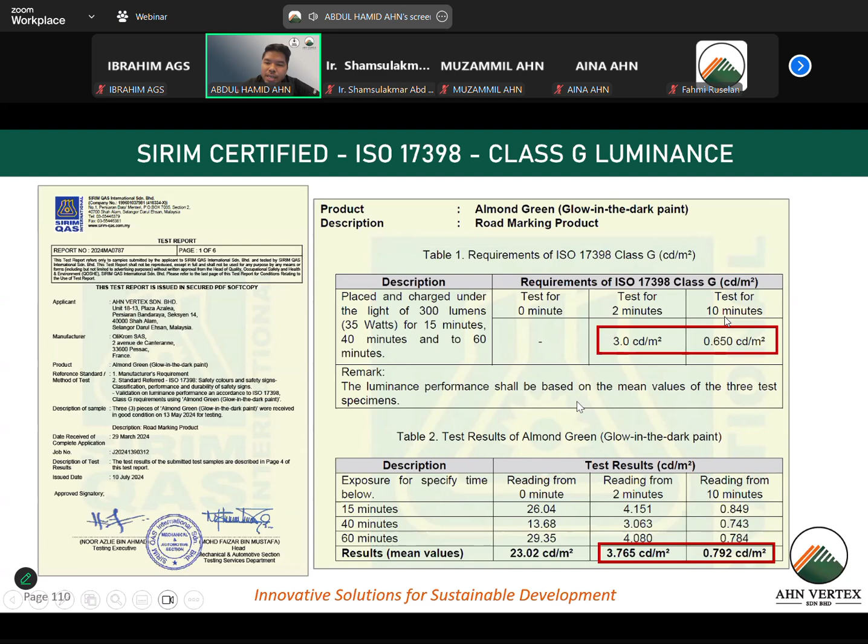So if you can see, the performance is beyond, it's all according to class G. The classes of the performance, maybe if you have more time I'll talk to you about it, or you can ask in the chat, and we can explain to you more in detail about the classes of performance of different glow-in-the-dark paints.

It all has passed the required result by SIRIM. So there's no safety issue, there's no performance issue. You don't need to worry about that. We have the SIRIM test to back our products.

So in conclusion, it is a green technology because it has zero CO2 emission. With this technology, we can help our government to commit to cut carbon intensity against GDP by 45% by 2030. This is according to the Paris Agreement, and also to reach 70% of renewable energy capacity.

Because if you use this paint, for example, as glow in the dark for road marking, you don't need to install road lights. You can save electricity on that. So that's why we said we can help Malaysia to reach the 70% renewable energy.

It can increase the visibility of lines or objects in accident-prone areas because of the class G specification, up to 10 hours time of glowing. It has excellent retroreflectivity in wet or dry condition with our beads. It is really easy to install, plug and play. It is the only product in the world proven since 2018, more than 5 years of track record. It can aid agencies or our clients in meeting their ESG goals.

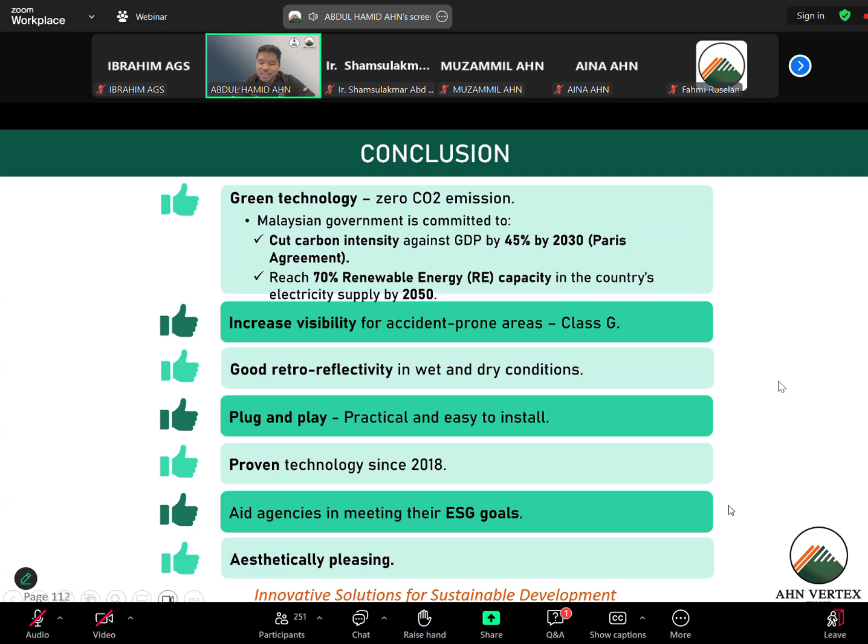Oh yes, and also beware because not all the glow-in-the-dark products you can see on the road nowadays are ours. Some of them are ours, but not all of them. So you want to see the difference. The good ones are our products. The bad ones are not.